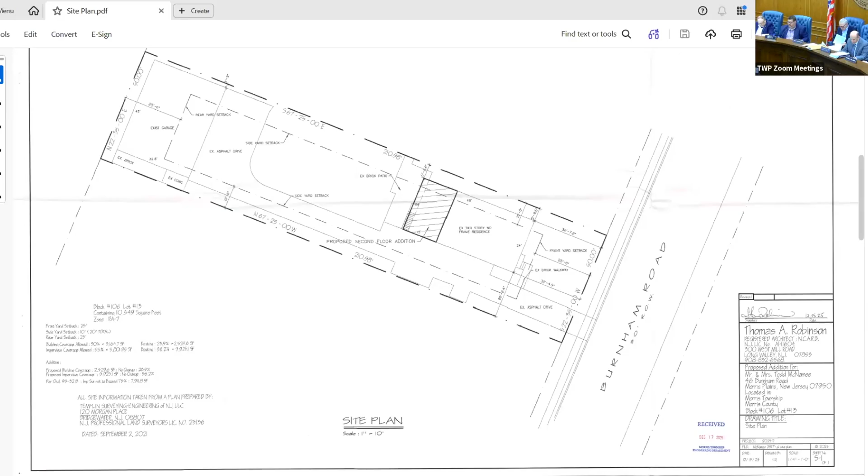Let me ask a question to clarify the interpretation. Is the combined side yard on the principal dwelling, or the principal dwelling and the accessory garage? Both. So you're taking one side on the dwelling and really both sides on the garage? Both sides on the garage are the combined, because we have a deviation.

1.8 on the other side, right, on the garage? Yeah, I think the garage is 1.8, and about double that on the opposite side, maybe a little bit larger, we'll go 3. Okay, so that's the combined side yard existing condition.

If it's lawfully existing, it's not exacerbated, but on the other structure it is. So 4.8 for that, side yard's 5.8, not worsened, 6.2 on the architect's plan where we're doing the addition. Correct, and impervious coverage, right?

Is there impervious on this too? Yeah, the impervious is not exacerbated. The proposed addition cantilevers over the existing stairs and brick pavers. I know, but we don't know how we got to that number in the beginning, so I think we should honor that variance now.

I would capture it now so that there is a variance in place for it, correct. Okay, so those are the 3. So we're doing a variance for impervious coverage also, just to clear it all up. Yes, and there's no water issues on your property now, is that right?

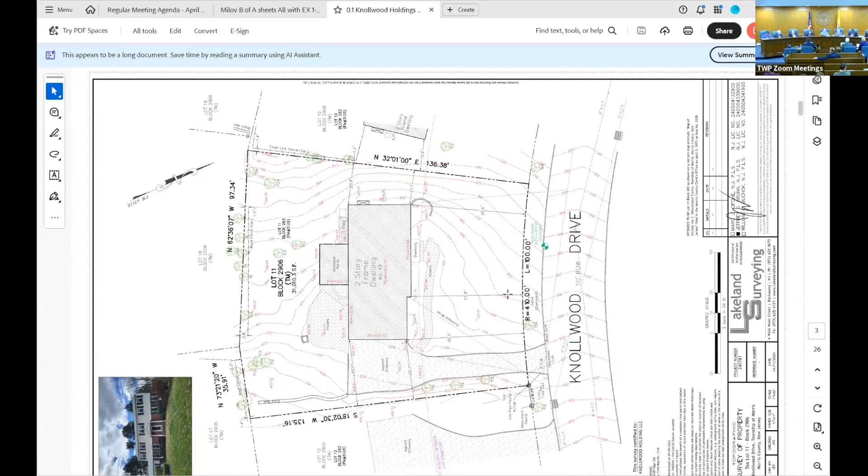Joseph noticed that the area on the survey was incorrect. This is the original survey, showed 31,000 square feet, and we found out that the surveyor did make a mistake and picked 2 lots instead of just our lot. So he resubmitted the survey to us with the corrected area, 15,791.7 square feet. And the zoning chart was updated to reflect that accurate lot area. Fortunately, it didn't cause any new variances to be created, so we're still compliant with the building and improved lot coverage.

So basically, any reference to the original sought-after building height of 38.4 has been crossed off and eliminated from the application. The only thing that we're here for tonight is the 2 side yard applications.

We have the left side yard, as you recall, due to a bump out. I'm going to scroll back over there. We have a proposed bump out in the front, which is respecting the front yard setback. But because the site is somewhat trapezoidal on a curved street where the lines get closer and closer as they get closer to the street, the side lot lines - our proposed corner is 0.5 feet closer to the side yard than the existing corner of the garage, which is 29.7.

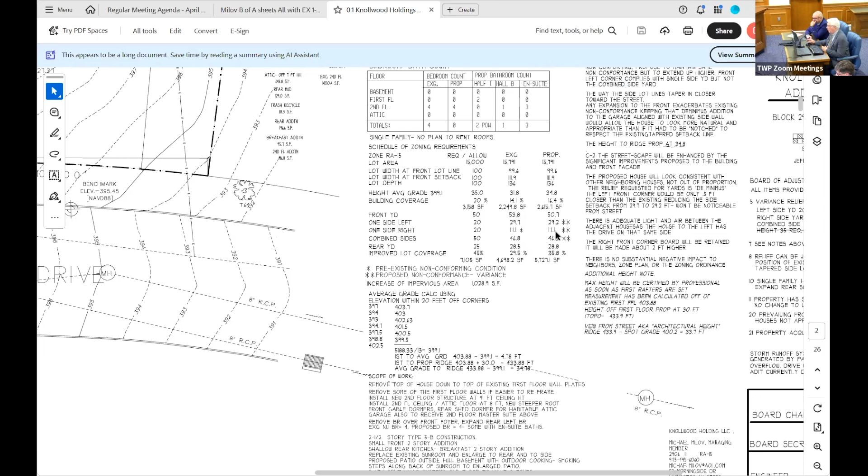I should have mentioned this - the left and right side yards also needed a variance for combined side yards because of that tapered lot line situation, where 50 is required and we're proposing 46.3. The one side on the right is currently 17.1, proposed to remain at 17.1, but we were asked to get a variance because it's going up a little bit higher than it is now. It is a variance, yeah. And then the left side yard I mentioned is now 29.7, proposed to be 29.2 feet.

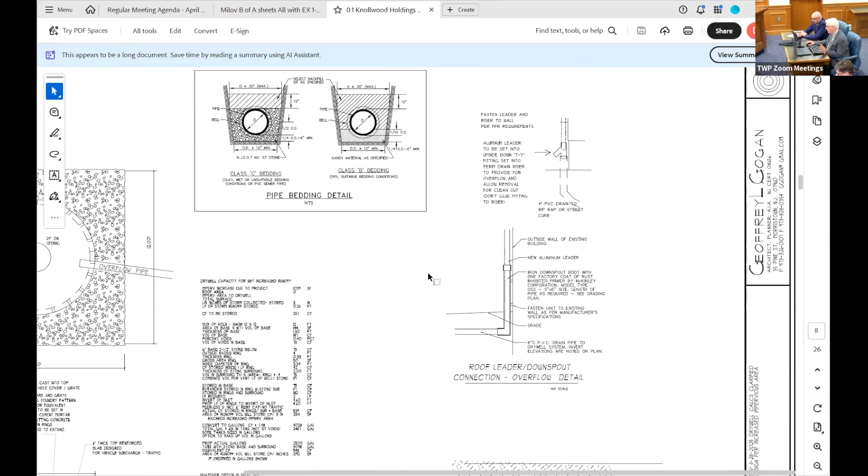So I think I'll go ahead down - that's the survey I talked about. Let me see the sheet numbers here. Okay, C4, I'm going to skip over these. None of these site details changed - they're just details for the grading, the stormwater, the plantings, some of the other details.

This is the first architectural plan - the original basement foundation plan that was filed. There was no substantial change to this plan, really no change that I can recall at all. All I did was clarify the room names. So this sheet has been replaced by this one, where I also took off all the architectural dimensioning and everything - I just left the room sizes and room names so it will be easier to discuss.

Essentially, the basement has a full basement below where the sunroom is now, and it's being enlarged a little bit, but right now that's just open space where a deck foundation exists. The sunroom was built on top of the deck. To the left you see the foundation, the existing garage slab is here, and the proposed bump out is over here. The existing full basement has a finished portion in the front and an unfinished portion in the back. The mechanicals will stay where they are. This portion here, he hopes to have a hobby baking kitchen with a slightly different feel, where he may have to leave dough overnight and things he'd prefer not to do in the residential kitchen upstairs.

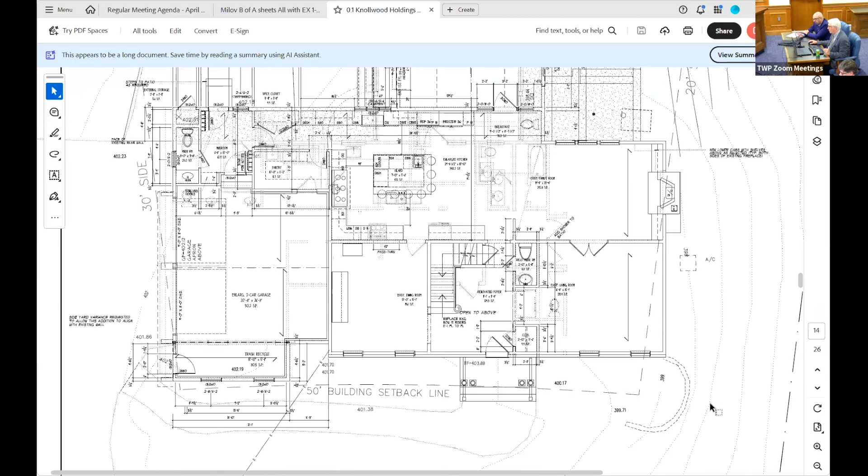I'll go back up to the site plan just to refresh you on the fact that we have these two side yard variances that we need.

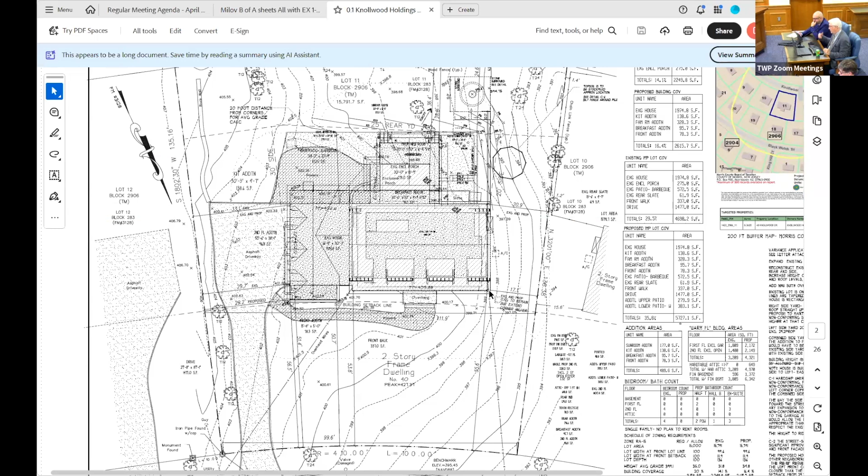Okay, so basically we have the pre-existing 17.1 to this corner. It's really not going up very much because it is going up a little bit, but not too much, so it's still good. It still looks like every other second floor in the area, pretty much, so that is staying the same.

And then this corner, I'll just zoom in here again just to make it clear. Essentially, we have the bump out causing that half foot closer to the side yard.

We actually talked to Dave Hansen about setting that corner in to respect the existing 29.7 setback, but we tried drawing it and it really didn't look that great. He agreed with it, and he had originally thought we should be able to get away with it. But so anyway, we're asking for the 29.2.

We don't feel it will really make much of an impact from the street because the adjacent house has their driveway and parking on that side. So there's still quite a bit of space, way more than normal or required as far as the distance from house to house. That is pretty much what underlies these side yard requirements.

We have an extensive storm drainage system proposed here with an area drain, and all of this is going to be reviewed by the township. I think that kind of summarizes the architectural end of it.

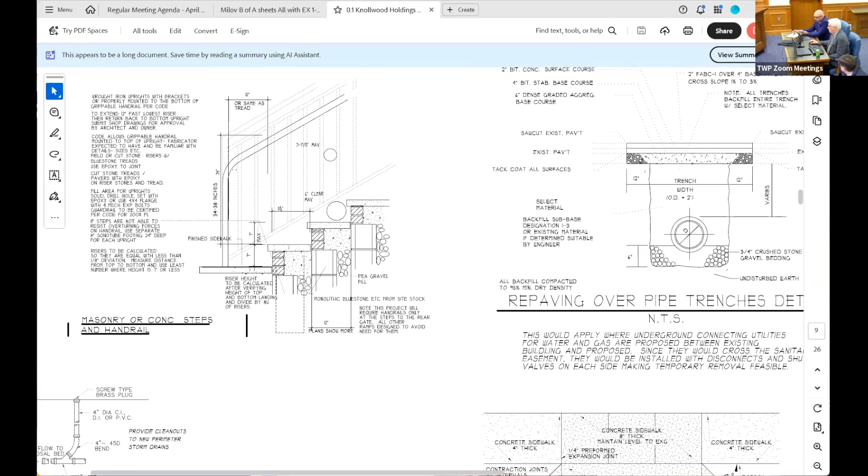Let me see, I think I just lost the... I'm gonna have to stop sharing and share again. I'm sorry, I must have just clicked something.

Okay, so the front appearance, we feel, is... I do have a picture somewhere in one of these exhibits, I believe, it was actually attached to the application, but basically it's very similar to the existing in the sense that the front door is still where it is.

The portico is being improved with nicer columns around it. All the windows will be replaced. The brick will just be extended a little bit and painted. And then a high quality siding will be installed like HardiePlank, with good quality roofing.

So basically it's just being an upgrade of a nice looking house. I left the roof pitches of the dormers as they are, but I lowered the dormers, of course, to agree with the new ridge height.

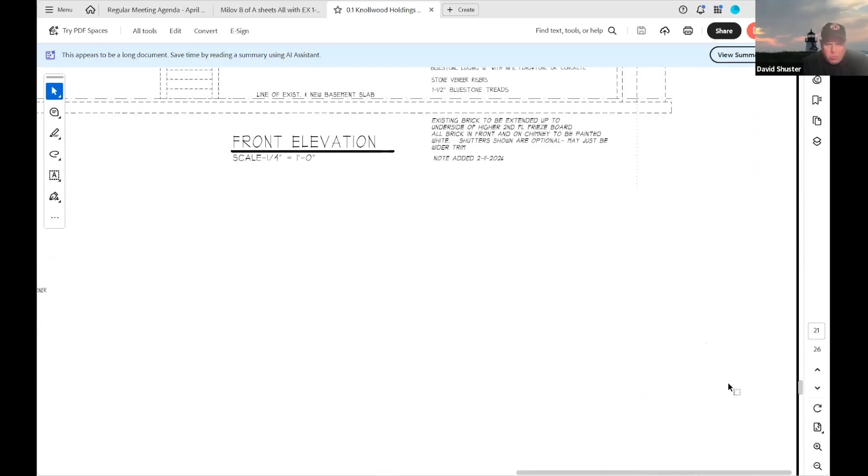Right, but then my concern is the use of the word 'permitted' with this other elevation. They're side by side: proposed ridge at 433.9 and 434.3 permitted. I think first that needs to be stricken because there is no 0.4 difference from the proposed ridge to the permitted ridge. The permitted ridge would have to be within 0.2 feet to stay at the maximum 35-foot definition.

Right, so I wanted to understand what the statement being made on the plan is, and then stipulate to correcting and striking it to ensure a fixed height elevation.

Right, I think what I was saying there was we're proposing 34.8 feet to the top of the ridge. And what we'll do is when we're framing, we'll get the first couple of rafters up before we even frame the whole roof, and have all that certified to make sure we're not over the allowed height. I was just saying there that under the zoning by right, we could go to 35 feet, but I figured a little less just in case of a little glitch in the field.

So we aren't proposing an exactly 35-foot high ridge. I just mentioned I wanted to make a distinction there that if it was, say, 34.9 feet, the zoning officer wouldn't say you've got to go back to the board because they approved only 34.8 feet. I'm just trying to say that our maximum is the 35.

Proposed height is 0.2 feet from the maximum, and you're indicating a 0.4 spread between what you're proposing and what's permitted, so there's an error. It's only 0.2. So that would be 434.1 as the permitted next to it on all the elevation sheets.

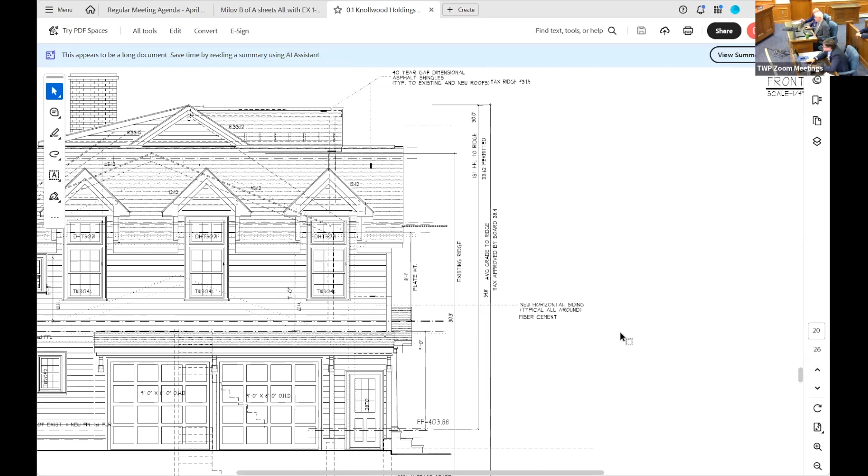Hopefully we can do that on the signature sets and just make it clear that we are not asking to go over 35 feet from the average grade. So hopefully the board can just accept that—there might be some remnant notes that I missed.

I think it's in each of your elevation views, between that reference to the 0.4 greater than permitted, that would be corrected, as well as the old max ridge line reference in a couple locations. Yes, I'll make sure we get those back.

The height calculation you're using for average grade is the same as last time to establish the average grade, which was 399.1, correct? And those are the same points provided by our township assistant engineer in the in-house calculation, then used for your calculation.

Yes, the 399.1, if I understood what you said, is correct. It agrees with what your engineer corrected us with. So we're using the same points for average distribution in 20 feet around, at a representative average grade height, as opposed to skewed in any particular direction.

You're agreeing with the calculation from our assistant engineer? Yes, I'm agreeing with it.

Okay, and the only changes made architecturally to the height were the first floor ceiling height, the second floor ceiling height, and then the ridge coming down in the habitable attic. So that being cumulative, correct, what would be just over 3.5 feet that were reduced architecturally in the plan.

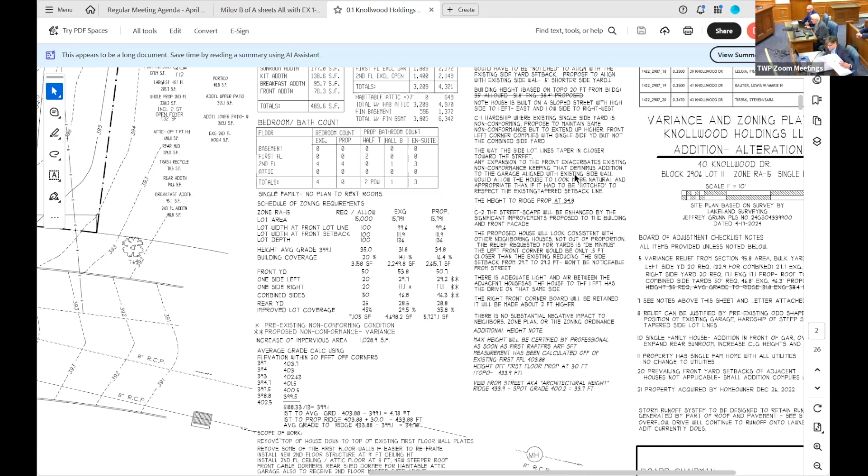And then on Board of Adjustment checklist notes, item 5, variance relief from section 95.8, and at the last line of that you have it stricken and corrected. So I'd prefer to see those items corrected on the plan set, on the board signature sets. I will correct those and make sure there's no ambiguity.

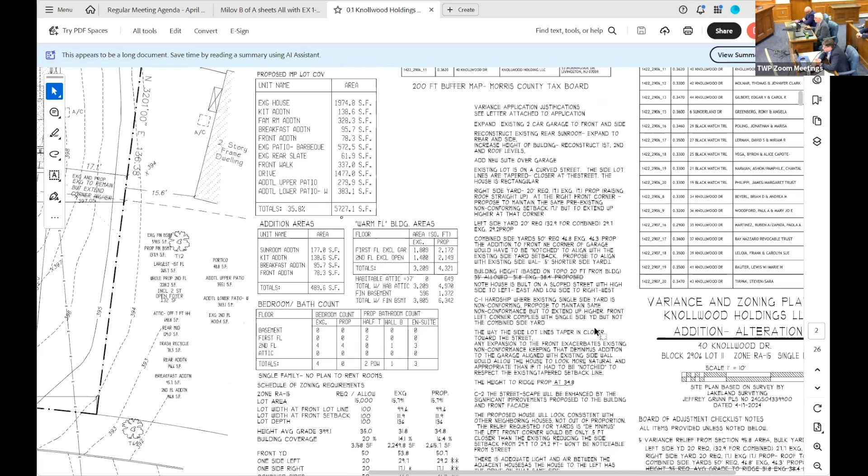Okay, and then the tables that you added, part of the earlier testimony, the warm floor area, building areas, and the bedroom/bathroom count areas, just to go back over those and have a better understanding for the existing floor area in the structure. We have first and second floor warm floor areas identified at 3,209 square feet.

And then is there a habitable attic, or is the habitable attic being created by the proposal? It's being created by the proposal. So currently it's not habitable, not roughed in any way. Right. And that habitable attic being created at 643 is slightly less than the prior, I think around 670-ish, yes, because of the 7 feet clear height. Yes, it came lower when we lowered the pitch.

And the proposal for that habitable attic, does that include just open floor space for open den use? Yes, it's not intended for additional bedrooms. Correct. Or plumbing to the third floor? Right, there's no plumbing, no bathroom proposed, just mechanical equipment and an area to do homework or have a little home office or quiet space if somebody needed it. And the applicant would agree to that as a condition? Yes.

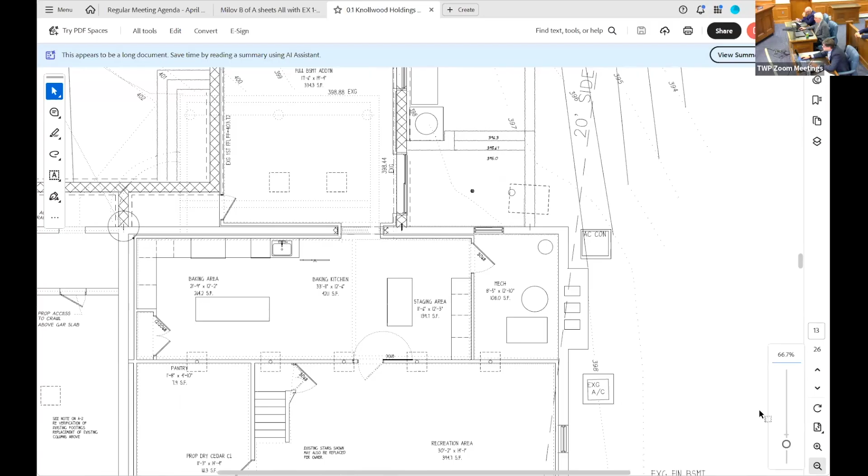It's unchanged. Okay, so the total habitable space, that area is partially finished currently, about a third of it is finished currently? Yes, this front, a third to maybe I'd even say closer to a half? This whole area is finished. So probably close to half is finished.

All right, and then so the total habitable square footage of the home is correctly stated at existing 3,805, and then increasing to 6,342. I have to go back up there.

I'm sorry, could you repeat that question? So the total with habitable attic and finished basement: existing at 3,805 square feet, and proposed at 6,342.

Yes, if you count the entire finished basement and habitable attic portion. That's the clarification I want the board to understand. You have the correct square footage of habitable areas on every floor, and the cumulative total is correct, no error. I wanted to get the subtotals because some people were wanting to include or exclude the basement and garage.

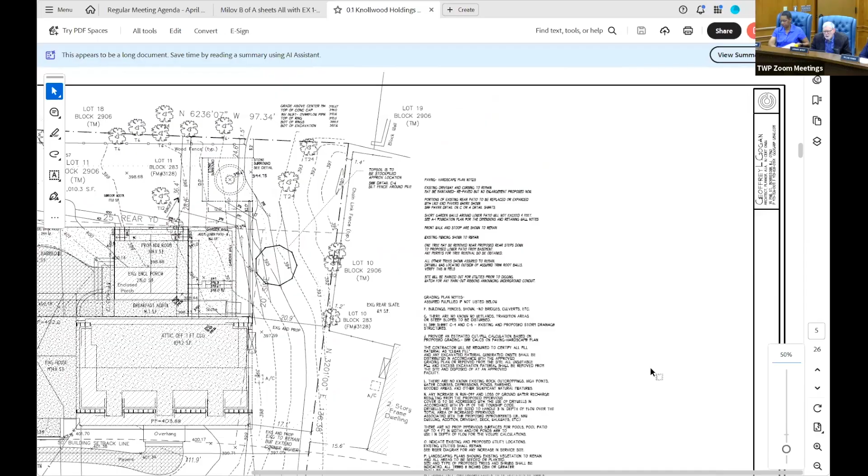So then the basement kitchen - can we stipulate that it won't be used for commercial purposes? That's a big kitchen. I mean, I like to bake too. That's a huge kitchen, you know, it's going to have to all be designed.

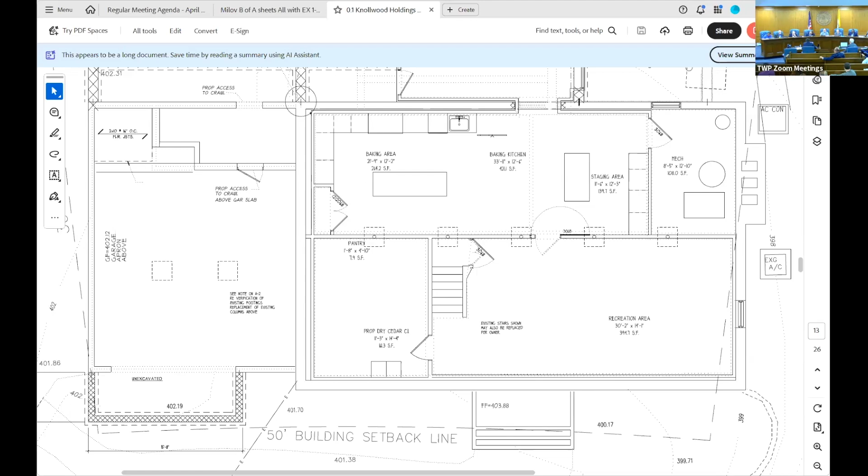Okay, thank you. Can you tell me approximately what percentage of the home is being demolished, and how much of the existing home is going to remain?

I'm sorry, the question is for the architect. Roughly a percentage.

If you don't mind, I'm just going to answer it this way. The entire rear sunroom is being demolished, and the roof over the existing garage is being demolished to make the new floor for the bedroom. But otherwise, the existing roof of the house is coming off, and the existing second floor walls and structure are coming off, because we're going to extend the first floor walls higher and build a new second floor, with pretty much the same layout. We're just lifting it up.

I heard earlier, maybe I misheard you, you mentioned something about needing the garage expansion for safety from animals. Is that what I heard? Maybe I heard you incorrectly.

I was talking about the reason we want to have this bump out in the front was to provide more space for bins, where it's convenient, right near where you would take them out to the curb for recycling and trash, and not have to leave them outside in an enclosure. But it's also to provide a way to have a pedestrian door that you could walk in without raising the overhead doors, so for example if there was a delivery or somebody visiting, they could just come through that side door. Okay.

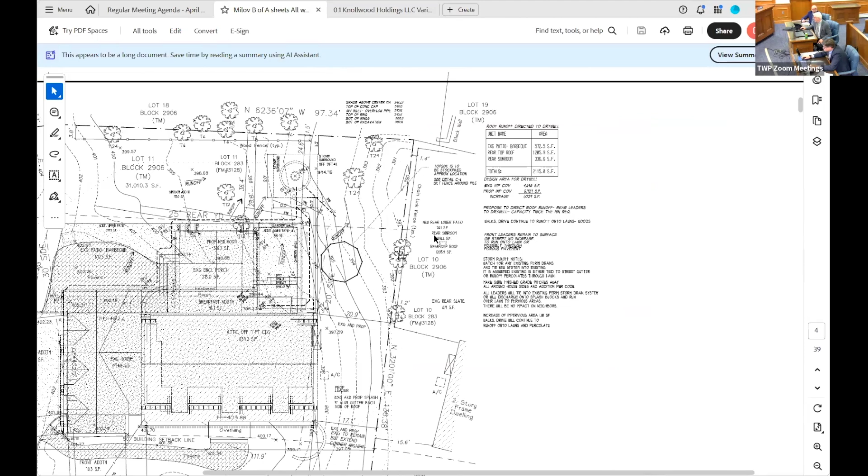This is the original set of files. So I'm going to zoom in on this. No windows. This is the existing house, the front here, and this is the left side where you just have the garage doors and the side of the roof. So there are no windows on that side.

Okay, and my last question is, did you identify any specific purposes of the MLUL that you're relying on for your C2 variance?

Yes. I don't have my physical notes here, but I did include that in my application as an attachment, so it's with all the original documents and online. And so I'm just going to use my exhibit here to go through it.

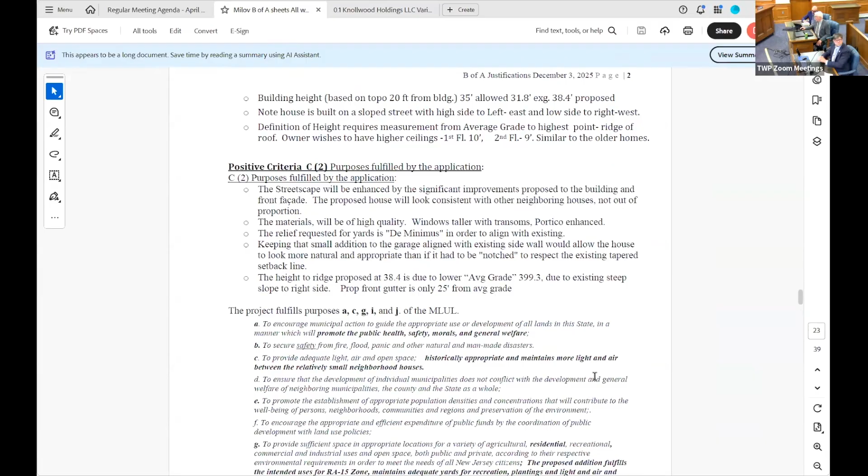Essentially, basically, as I mentioned earlier, we have two paragraphs of proofs. It has to do with the C1, which has to do with the hardship. And we feel that those existing tapered lot lines and the pre-existing non-conforming corners could be qualified as a hardship that an owner has to just cope with. For example, the 17.1 on the right side is what it is. We're just going up a little bit over that.

Right, my question was about the C2, though. I understood your testimony about C1. Okay, so the C2, I feel that we're providing, we're fulfilling paragraphs A, C, G, I, and J.

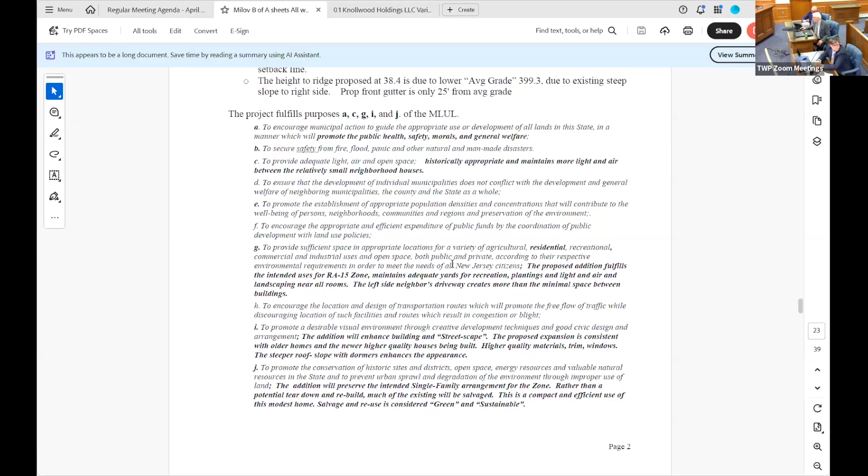A has to do with safety and general welfare, and the fact that the garage is going to function better and have a more suitable way for guests and deliveries to come and go, and have the bins controlled and inside a secure area.

I'm sorry, you said deliveries come and go? Well, like if someone has a delivery, or if a guest comes and they want to visit and come through the side door, that's all. Okay, but you're agreeing it's not a commercial use? No. I mean just a private home delivery.

Okay, I don't have any more questions. Let's pause for a second. In providing your proofs, the promotion of public health, safety and general welfare, as you're stating them, they need to be comprehensive to the public and the township as a whole, not to a benefit of the applicant.

It can't be rephrased from personal to saying the applicant. And the way that you just stated that was specific to the operation of the trash and other things. Frankly, trash management is something that all neighbors have to address and need to conduct safely. So whether it's in the garage or in a designated area inside the garage or in an annex, that's not constituting the proof as stated — it was more individualized. I'd like you to just revise that statement to make it more broad to the public and to the township to satisfy the proof.

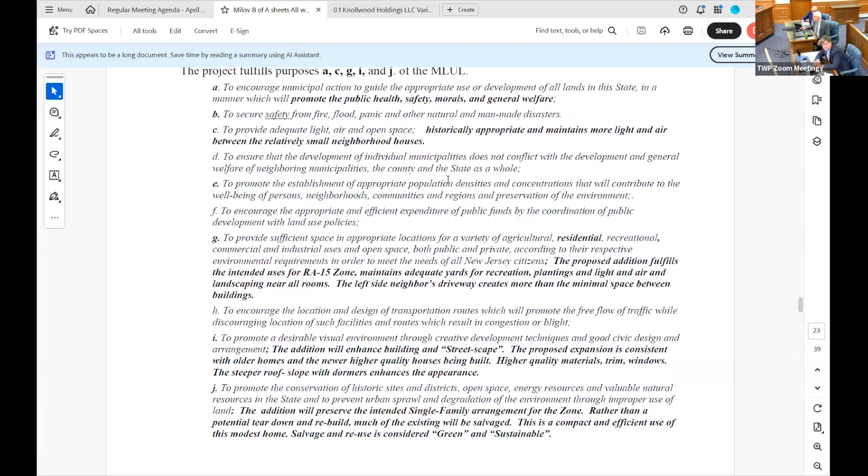Yes, and in your direct testimony, when you spoke about the C2 proofs, you mentioned aesthetics, which is purpose I. You didn't say purpose I, but that is purpose I, right? Correct, yes, I would use the aesthetics, yes, in your application papers. But purpose I is with respect to aesthetic improvement. I'll accept what Joseph is saying about the purpose of A. Well, in all the purposes you are speaking to, the benefits are to the global welfare of the township and the residents and the neighborhood, as opposed to the applicant.

Okay, well, I'll accept that you're probably more aware of that global intention for those paragraphs. I've used those before and felt that, for example, historically appropriate under C, where the house is traditional and it's providing light and air between homes with the way the roofs are set up.

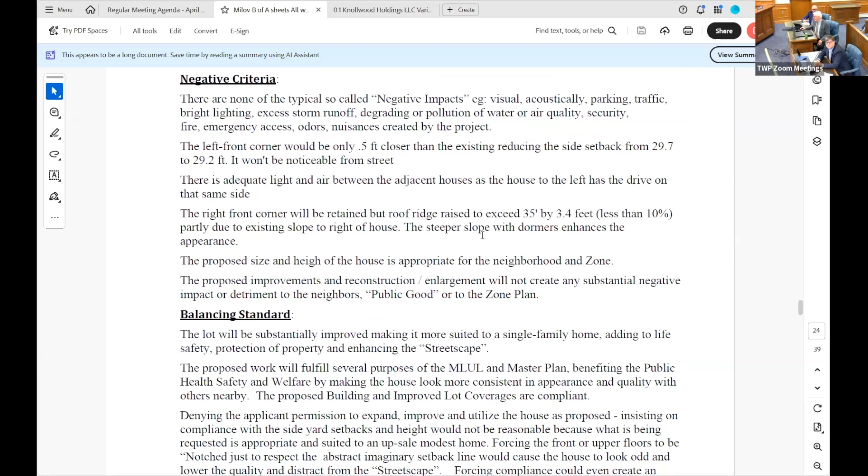And then G has to do with residential uses and the fact that we are fulfilling the intended use for the zone, being a single family home, but updating it for current needs of this period of time, where you have multiple people in the home living together, working, going to school, and doing a lot more in the home remotely than they used to do. Is the existing home vacant or underutilized?

Is the existing home vacant or underutilized, or unable to come to market to be inhabited as it currently exists without additions and alterations?

So basically, purpose I is the key that has to do with the improvement to the streetscape, and the fact that it's consistent with the more traditional older homes, the higher quality homes being built, and the high quality materials, trim, top of the line windows, and the steeper roof with the dormers just creates a nicer street frontage.

Okay, but you didn't answer his question. Is the house currently vacant? It was rented for a year or so, but I think it's vacant. It's vacant right now? Yes, vacant. It was supposed to be under construction by now, but we're delayed.

So the lease had run its course as opposed to becoming an underutilization or vacancy. Right. Is it marketed currently? It's not being marketed now. Okay.

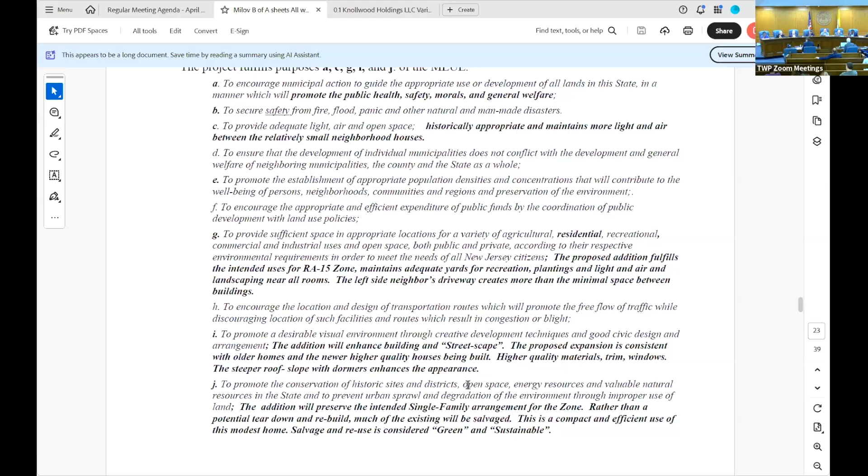The existing home can be in character to the neighborhood, and the proposed improvements can also be in kind with the character of the neighborhood, if that's what you believe the appropriate improvement has been architecturally put forward to promote, while providing for a modernization that makes the home more marketable and desirable for a longer continued lifespan. Right? It can be both.

I just want a clear understanding of whether it needs to occur because it's underutilized and not marketable, and therefore coming back to the neighborhood because others have done improvements, or if we have a neighborhood that exists as it has been, mostly with minor improvements, and this larger scaled improvement is still in kind with that neighborhood. That distinction should be understood by the board and in the proof.

I wouldn't object to that. I think that's a good way to state it, and I'm going to try to remember that.

So you find the existing home as is in character to the neighborhood, and you feel that the proposed improvements modernize and help the home, improving it while keeping in character to the neighborhood. Is that your testimony? Yeah, I don't feel that the improvements are too extreme to where they start to look out of place, and the fact that we're still pretty much consistent with the yards and so on. Okay.

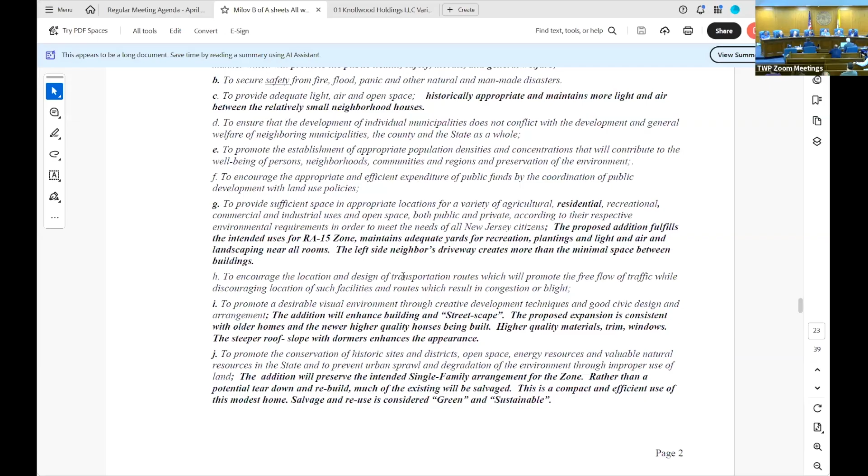Good evening. Timothy Dixon, 14 Kissel Lane, also an owner in the neighborhood. Before asking about the variance on the front of the property, I noticed that the back of the property, the yard, tapers out to the left. Why wouldn't that extension on the garage be able to be put on the back of the house where the variance would no longer be needed?

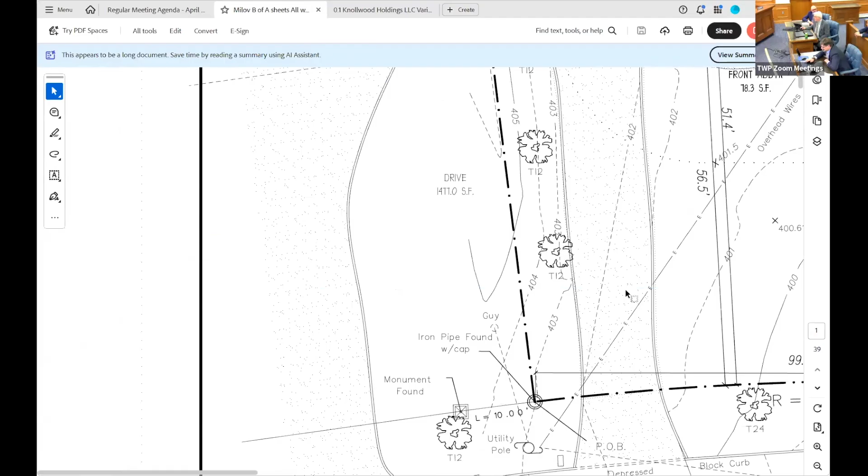Okay, I'm just going to go back here so I don't have to scroll. You're saying, what you're asking is why is the bump out in the front not feasible on the left side of the house? Yeah, generally before you ask for a variance, you've exhausted all other options to make the property work and be in conformance with the permitting laws.

So my question is, there's plenty of space on the back of the house. Why wasn't the extension put on the back of the house? It would still serve the same function, access for deliveries and guests and an area for your trash, but you wouldn't need the variance.

All right, so there are many ways to do things. When I was looking at this project, I think it really came from the front elevation. I'm going to go down to that, where we always try to avoid allowing a house to look too boxy, so to speak. Where you just build over a garage and extend the roof, and all of a sudden it looks like it's much too big.

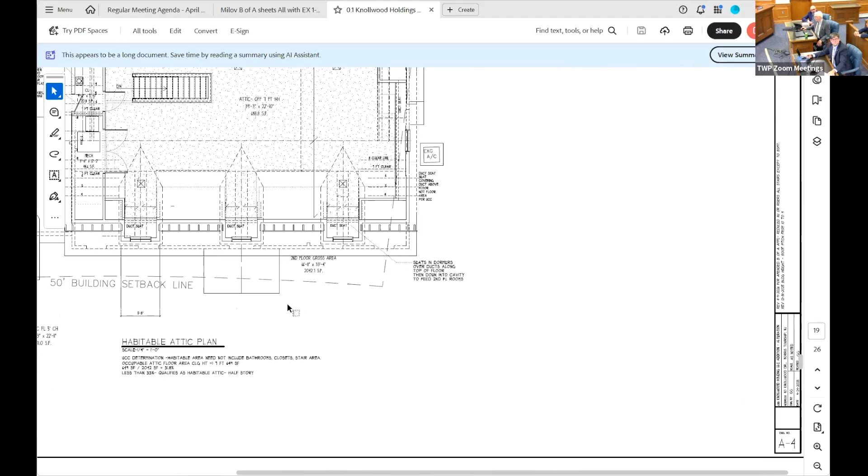So I wanted to be able to turn the roof 90 degrees over the garage, and make it look like almost a mass that has its own roof connected to the original box of the house, which is here. In order to do that, I couldn't just have the side go straight across. I needed some corner boards and a slight difference in the front elevation. I wanted to turn this corner back, then come across and come back out, and have something under this new gable end, which was also becoming part of the master suite above the garage.

So it just made sense on both levels to do that here, for the sake of the front elevation, so that it made the reverse gable, or the 90-degree turn of the main roof, make sense and look like it needed to be that way for a reason. So again, I'm not an expert in this, but it sounds like it's more aesthetics than actually needed for function to be able to build the property that way.

Well, certainly aesthetics is part of it. But unless I'm understanding it wrong, aesthetics is not a need for a variance. Well, I didn't see that in the code list. I don't know it exactly, but.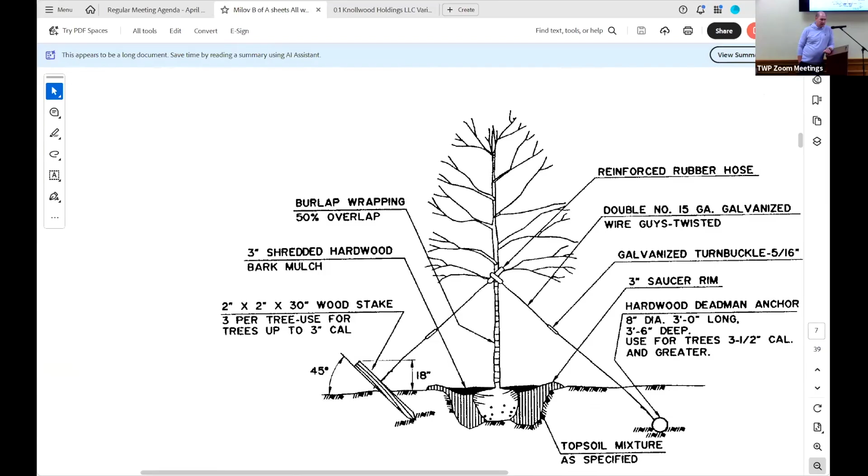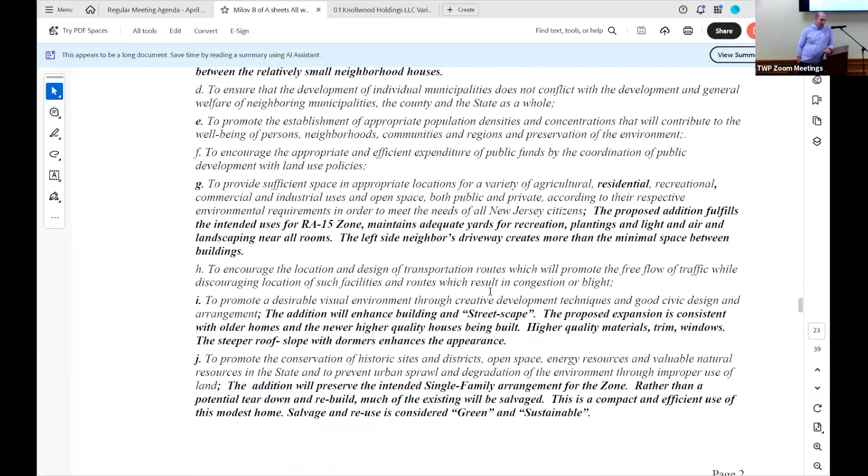So those purposes do include what's known as C2, which has to do with aesthetics, where you can use aesthetic improvement, especially if it affects the streetscape, so to speak — basically something that will improve the yard, streetscape, landscaping, and overall appearance. It is an accepted justification for granting a variance, even alone, without practical hardship.

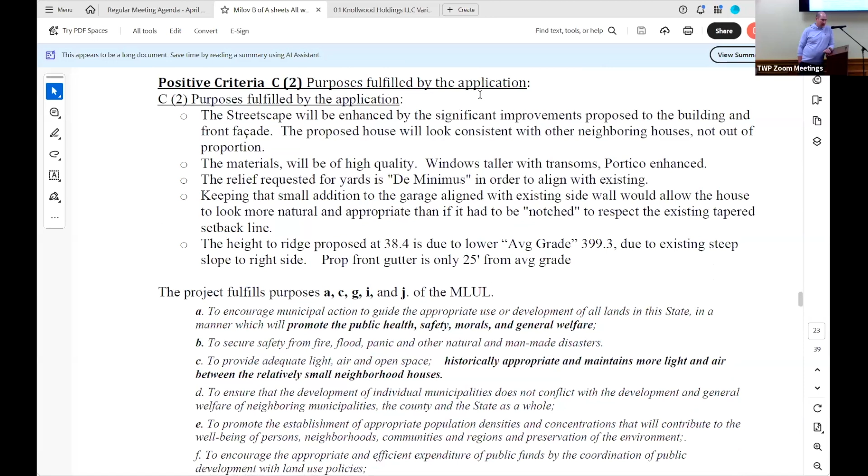Right, but the bump out was a C1 variance, not a C2, correct? Well, it was both, because I felt it was C1 due to the pre-existing non-conforming corner, and we could have complied by just shifting the corner. I just wanted to show you that. No, I saw it. So we'll table that for now.

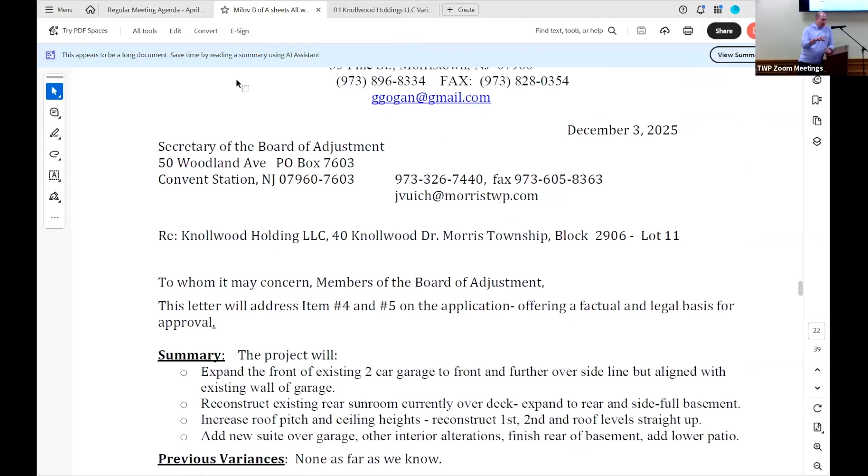You said that the updates are to be consistent with the aesthetics of the neighborhood. I believe this question was brought up at the last meeting: how many houses in this neighborhood have 3 stories with dormers on the 3rd floor? I can't tell you that answer — I haven't surveyed, I don't think. So the question was asked in the last meeting and not answered.

So how many homes in the neighborhood are in excess of 6,000 square feet of habitable space? I haven't done that analysis. They're counting the basement, and you're counting it before and counting it now, but you're making it bigger and more furnished, so you need to count that space.

So again, another question that was asked and not answered. Those are all my questions. Thank you. Thank you.

Brian Milio, 16 Canterbury Way. Just spell your last name, please. Milio, M-I-L-E-O. Thank you. In line with questioning, I guess, like the last two residents, friends of mine. I'm sorry, did you give us your address? Yeah, 16 Canterbury Way. 16? Thank you. Yep, thank you.

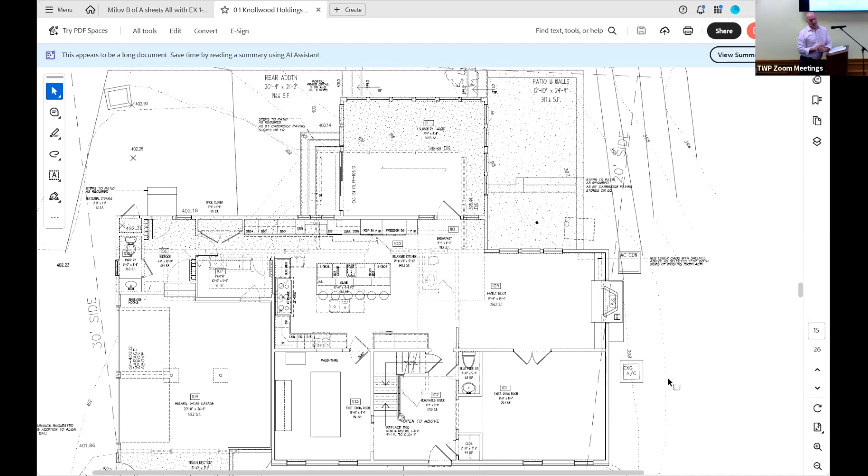In the application it quotes being in line with houses in the neighborhood. I think Tim asked how many houses are above 6,000 square feet. I would ask how many are above 6,500, and ask you to check that calculation on the square footage of the house. I would ask if you're including the closets in that calculation of habitable area. What is excluded from the habitable area? I'm assuming mechanicals, garage, you mentioned — what is actually excluded from the habitable area?

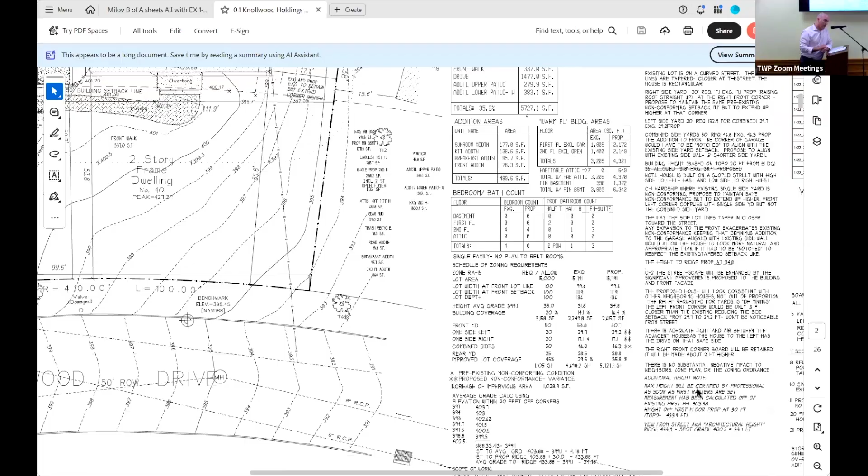Right, let me just say that when we look at building coverage, or in some towns there's a floor area ratio where people want to see the overall size of a house — we don't have that in Morris Township, but we measure to the outside surface of the walls, and it includes all the closets, all the mechanical space. There are some exclusions, but when a realtor compares houses, like if you see a house listed as 5,000 square feet, they're usually just referring to the warm floor area, or they'll qualify it and say plus garage or plus basement. So the 6,000 square foot number you're using is a total gross area of the house, not just the warm floor area, which is why I tried to show it separately.

The first floor, excluding the garage, is 1809, proposed is 2172. Second floor is 1400 and 2149, and that excludes an open foyer where a bedroom's being removed. So that total is 4321.

But then if you add, we have a habitable attic, which most people don't have. You wouldn't even notice it. It's still the same roof. Essentially, you're just finishing a little bit of it for a bonus room, so to speak. And that is counted as 649. That brings it to 4970.

And then if you count the finished basement, which is all below grade, just about all, there's some walkout in the back, but it's all hard to see, it brings it to 63. So you really should be comparing, if you want to look warm floor to warm floor, the way a realtor would talk about houses in the area, it's more like 4321. That's the number they would use to compare.

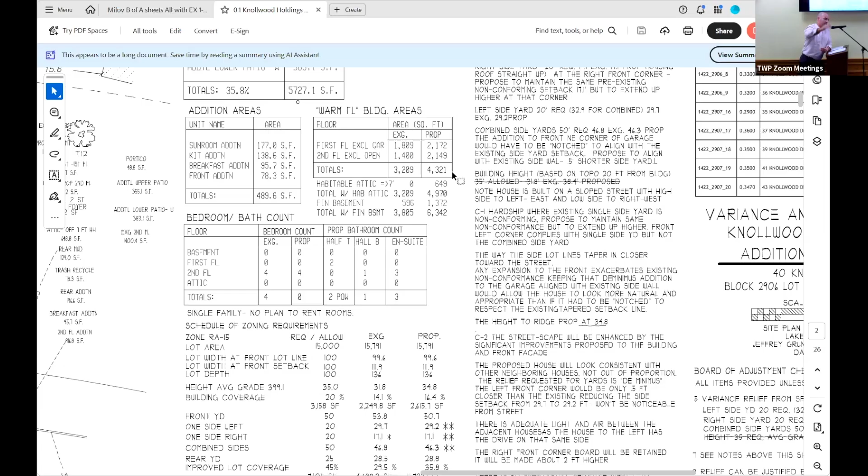So based on that, are you asserting that those extra spaces have no impact on the home or the neighborhood or anything of that sort? For the assessed value, because that's what you seem to be implying when you're comparing 4,300 warm floor, but you seem to be excluding, I see the number is there, but in terms of influence or impact, you don't seem to be putting much weight into that.

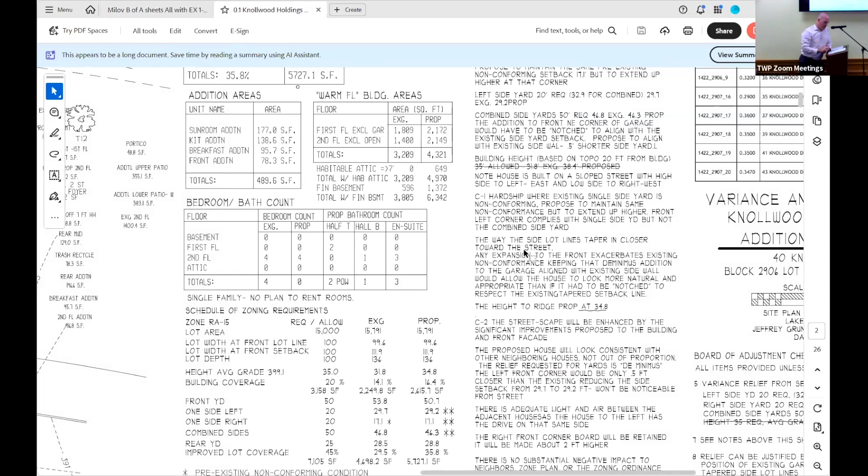No, I'm not really trying to say that. I'm just trying to say that, let me see if I can not have to scroll here. No, I'm going to do it. If I go back down to the elevation, because I think the overall point of your question is about the overall volume of the house as compared to other houses along the street. Is it going to look too big, comparatively speaking?

Well, that's one aspect of it, but I would think everybody in this room would be concerned of volume. If you create a box, as you said before, which would be unsightly, well, there's issues with that, but to create a box in that footprint and jam 8, 9, 10,000 square feet into it, I think there'd be a lot of concerns with people in the neighborhood, especially when the majority of these houses are in the order of 3,000 square feet. To Tim's question earlier, are there any houses that you came across in the neighborhood that are upwards of 6,000 square feet?

I think my answer is that basically you have a proposed 2-story house, which there are a lot of in the neighborhood. It looks like it's basically got a 9-foot ceiling. I don't know how many 9-foot ceilings there are, but that's not very uncommon in homes today on the first floor. So you've got a 2-story house. The gutter line is still about where it was, maybe a foot higher. And instead of a low slope roof, we have a steeper roof, but it's still a roof. So it's going to look like a 2-story house with a roof.

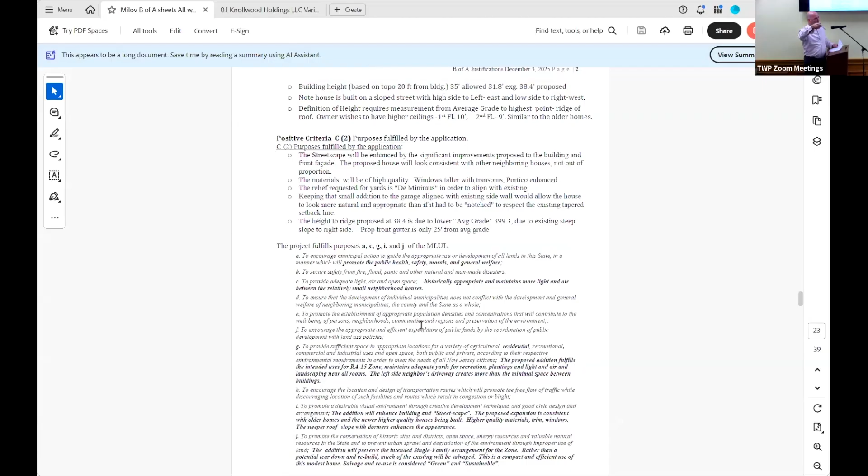So just to get back to something that gentleman mentioned, I want to clarify. The total square footage under roof, habitable, to the outside walls, including the basement and the attic, is 6,342 square feet. And the only thing we're excluding is the garage—does that include the garage? Yes, so everything under roof is 6,342 square feet.

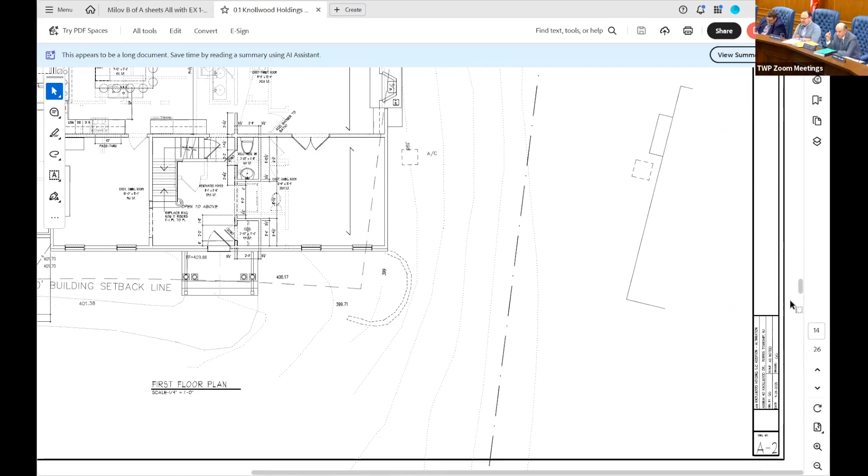Let me just go back up and make sure. Looking at the floor chart—first floor excluding the garage, and second floor excluding open areas. Would that be open air areas from the first floor up? There's an open foyer at the front door, because you have a two-story foyer coming in, right? Right. Okay, so we're all on the same page.

What's the under-roof square footage? Well, it's correct to say that both of those areas for the first and second floor did not include the garage—the existing and proposed did not include the garage. 'Cause I thought... okay, that's the nature of the question. Well, that's not really the question, but we'll get to it again. So under roof is...

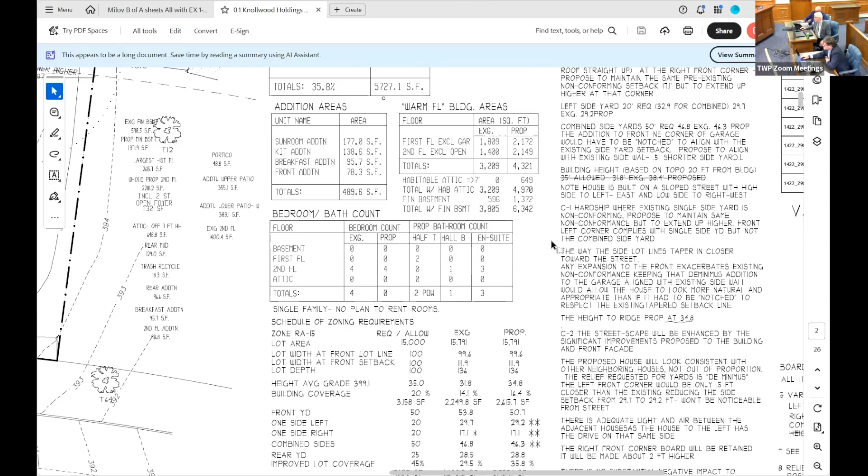6,342 square feet plus the garage? I think I can give you that. I just want the number under roof—what's the under-roof square footage, including the garage? Yep. Okay.

The garage is 20 by 26, so 512 square feet is the garage. Rounding up to 600, that's proposed for the garage with the addition.

Well, he just said 512. Let me check that number. That was the existing. The first floor plan shows the enlarged two-car garage at 512.2 square feet. There's also the trash recycle area below that, which is 80.5 square feet. So cumulatively that's just under 600 square feet of trash recycling and two-car enlarged garage.

So 592 and a half, right? Okay, so we're around 6,900 square feet, a little over, under roof. Right, that's what I'm asking you, you drew the plan. What's the number? Yes, if we could add the garage back in, you'd be up in that area.

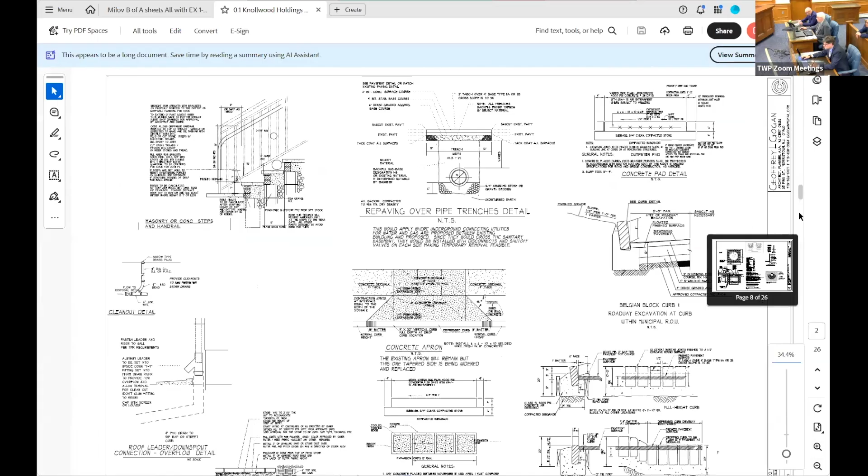Mr. Aller: during the break, the applicant's architect came up and mentioned some possible modifications to the plan. I talked to the owner about it, taking into consideration the neighbors' concerns. I'm going to go down to the elevation here.

What the owner is agreeable to is removing all 3 of the front dormers from the front roof, just having roofing there, similar to the other houses. He'll give up and stipulate that he doesn't need to keep the habitable attic—it would just be a plywood floor for storage and mechanical, like most attics are. That would remove warm floor square footage from the house.

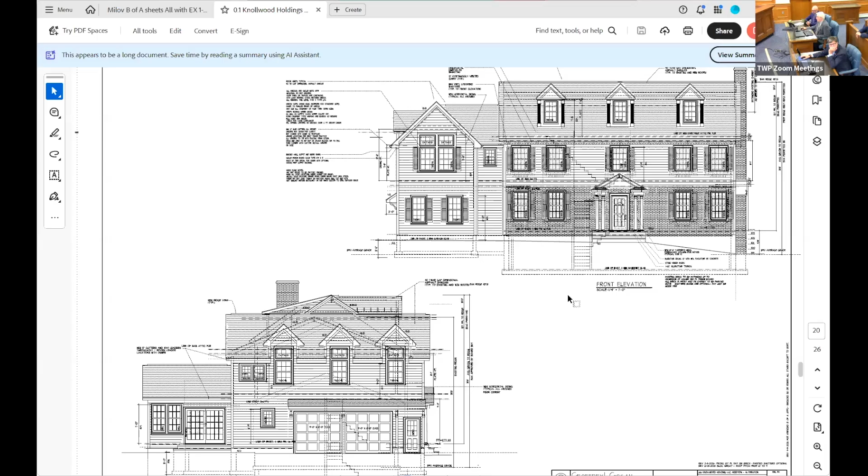In addition, regarding the basement kitchen, we would just call that a wet bar—just a sink and refrigerator like you'd have in any recreation room in a basement. We don't have to call it a baking kitchen or staging area. It would just be for workout equipment, like other residential uses in the basement.

So those are 3 substantial changes. Let me just zoom in here.

There was another concern about the front bump out. We'd like to keep a door there if possible, because the overhead doors, columns, and girder are where they are, and I can't fit a door in there. There is a door in the back, but it leads to a finished mudroom area, not an unfinished garage area. So we could take about 1 foot 2 to 1 foot 4 inches off the depth of the front, and that would happen all the way up, maybe even more—we were trying to keep the door and enough room for trim and structure. That would basically bring this corner closer to the existing front wall of the house.

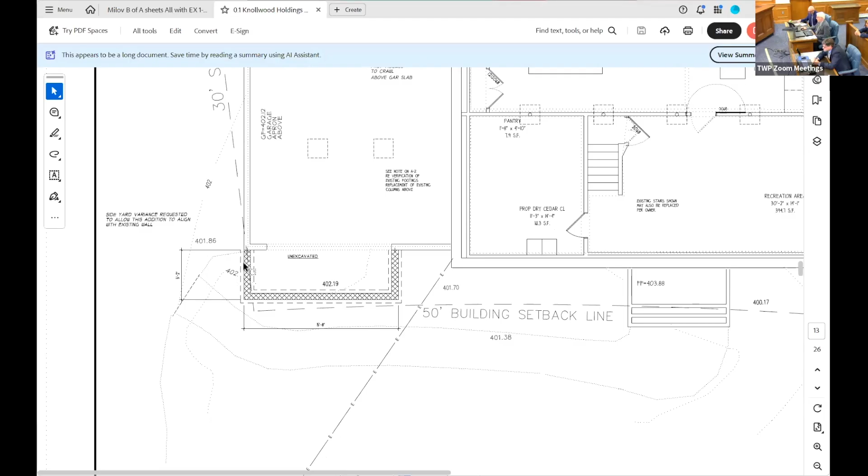We're willing to discuss this front bump out if it's a problem, but every foot you go back reduces the non-compliance with the side yard. We don't think it's feasible—originally we didn't want to notch there, but we could revisit it. If this corner had to be pushed over half a foot, it wouldn't quite look right, but we might be able to revisit that. Pushing this whole wall back a foot or two inches would make it look more agreeable with the existing front plane of the house, and we could still have enough trim and corners to make the roof look logical.

Do you know what the setback would be? Are you able to do a calculation where if you continued that front wall across to the point where it would intersect with that new section of the garage, what the setback would be from that point?

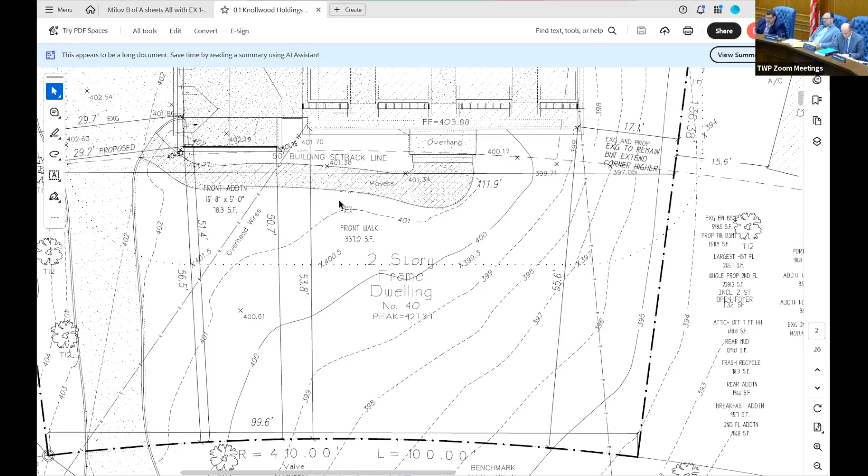Yes, right now the existing setback to the existing corner of the house, to that main corner, not the garage corner, is 53.8 feet to this corner. Our proposed setback to the corner of our bump out was 50.7 feet.

So if we went back a foot, it would become 51.7. If we could just adjust that, the setback to the corner of the garage right now is 56.5, and the proposed front on that corner is 51.4. So basically we'd be adding to the 50.7 to 51.4, whatever amount we go back.

Yeah, I meant the side yard. Because if you're going to ask the board to get to a vote, what are we voting for then? So what are you proposing the side yard setback would be?

Currently it's 29.7, you're proposing 29.2. So when you move that wall back so that it's consistent with the front wall, you get to that point, and that point to the side yard is what? I'd say we could call it 29.4.

So you have a 0.5 difference in existing to proposed. And then you have a 5 foot, 2 inch difference in the proposed bump out forward. So roughly on a linear scale on that corner, each foot you go back is 0.1 of a foot in setback. Exactly.

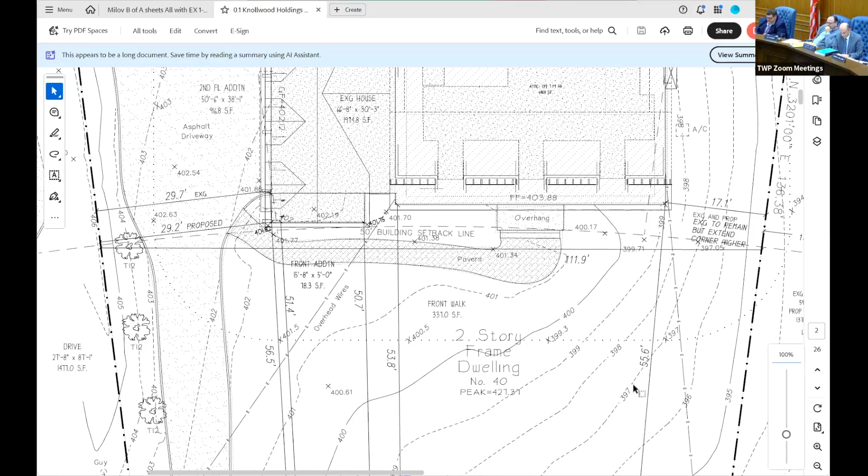So I think for what you were discussing, about a foot to 2 foot back would be another 0.1 or 0.2 feet on the setback, respectively. Okay, I just think we should know the number. Well, I think we could go ahead and just say we could agree to 29.4, and I'll make sure the plan agrees with that.

So your proposal is to change that side yard to 29.4 feet.

Okay, the basement change would be only a wet bar, sink, rec room, right? No separate kitchen. Right, I think that was the key, really. The habitable space on the basement is the same, it's just not specifically purposed as a kitchen.

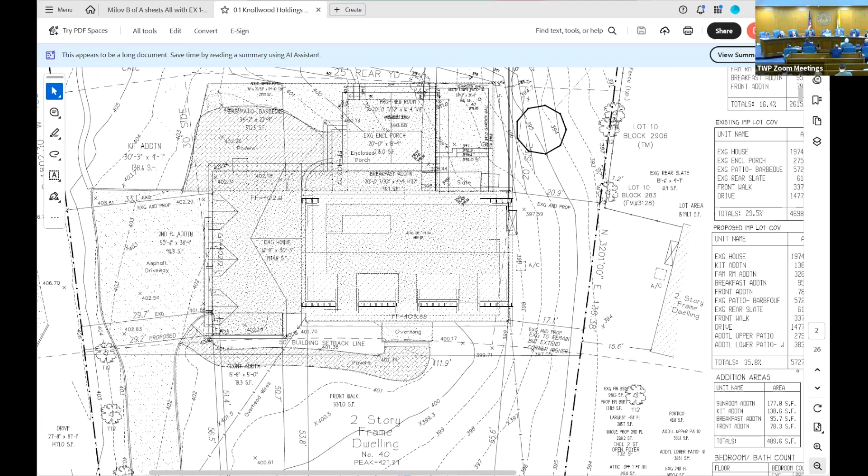And removal of the 3 front dormers. Is that all of it? I believe so, yes. The habitable attic also - no habitable attic. There's still an attic, it's just not noted as habitable, which means you're not finishing off the attic. Correct.

That's everything? I think that was it. Yes. Okay, so we understand the change of the plan. Do you have any other witnesses? No. Okay, I thought the owner wanted to say something, no? No, you're good?

Yeah, you didn't finish cross. Oh, I thought the line went away, so.

Okay, members of the public, we can still continue. Going to open the public portion.

Well, can the public see what the plans are specifically? Because they might... sir, but we need you to come to the microphone.

Paul Woodford, 36 Knollwood Drive. Thank you, 2 houses down.

I think the public has a right to be able to see the plans and evaluate them before any vote, so they can make a meaningful cross-examination and meaningful comments. So I think we have to have revised plans before we can do anything else. Yeah, and honestly, I don't disagree. I know you're trying to say all these things so that the board would vote tonight, but they're important.

You can see you brought out the whole neighborhood, that's how important it is. And I think we need to know, really, if we're going to - we need to know that it's 29.4, for example, right? So we need to see that plan, and then I think there might be a fairly quick subsequent meeting to resolve it.

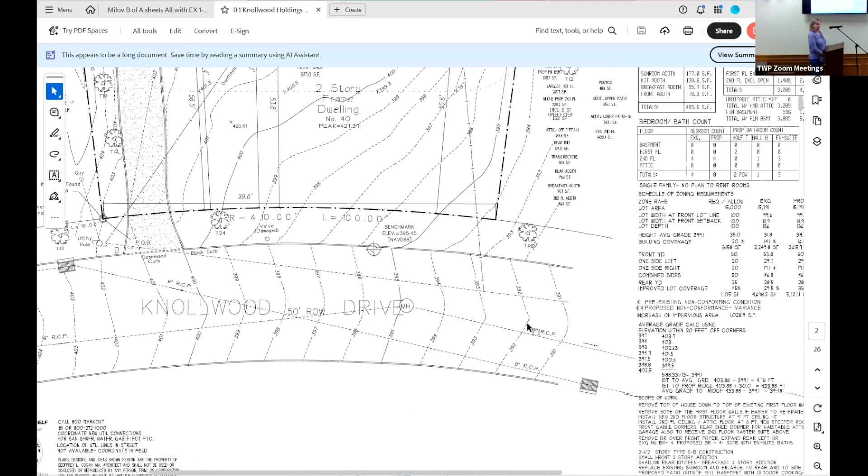The reason I'm hesitating is this whole thing is kind of a moving target. I know we have a lot of pull-down stairs, and the owner would probably be agreeable to it, but we can talk about it, and when we resubmit, we could look at it. Even for unfinished attics today, we often put in safe stairs with handrails where you don't have to use a ladder or a pull-down stair, because people are going up in age. They want to feel secure going up and down to get Christmas decorations and so on, and be able to send anybody, like a child, up there to get a box. So it isn't uncommon to have a comfortable stair up to an attic.

I would agree if the house was the size of my house, but being the house is so large and you have so much storage in the basement, why wouldn't you just put these items down there? It's getting to the point where there's a lot of recreation space, and now the kitchen's getting much smaller. This is questions for the applicant.

We have mechanical equipment that has to be maintained. I don't think it's necessary for us to agree about what kind of stair we're going to have to the attic. These things are starting to cross over into the owner's preference, where any house could put in a stair to an attic without any approvals, as long as it's for safety and convenience of going up and down, and it's not a finished attic. So it's going to be stipulated that this is a non-finished attic with a plywood floor, and that's it.

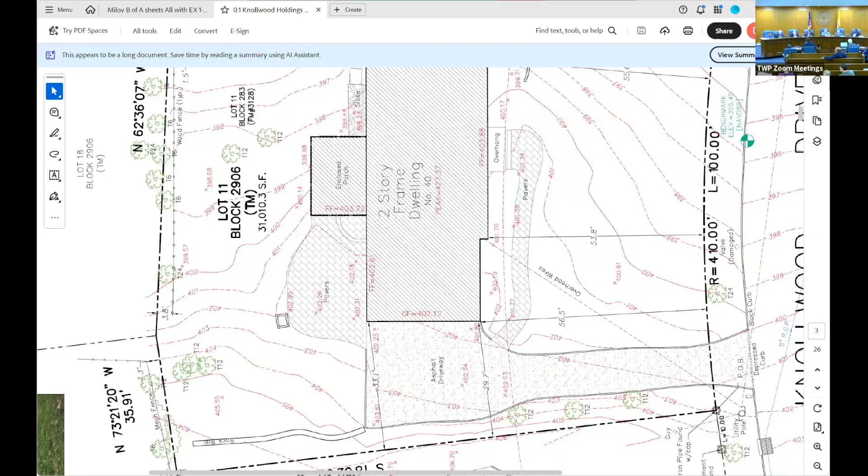Hi, Ashok Narayan, I live at 21 Black Watch Trail. Can you spell your last name please? Ashok Narayan. A-S-H-O-K N-A-R-A-Y-A-N. I live at 21 Black Watch Trail, which is right behind the next street down.

Issues about all these modifications. The diagrams don't really explain it in terms of the environmental impact, because we've had, especially next door, my neighbor, and to a small extent myself, some stormwater overflow. So as to how these changes will affect the pooling of puddles in the backyard, that acutely affects next door, and it affects us too to some extent. And as to how it's being addressed, because if a tree that's there is going to come down, then that'll adversely... I don't know if it's going to come down, maybe the tree still is going to exist. But that's the other question I had.

Okay, let's do one question at a time. Right now we're asking about drainage, right? So is there any impact to off-site drainage? If anything, it's going to be less off-site runoff because we have a very nice dry well and we're picking up most of the roof leaders. Certainly all the new roof area, I think I have this entire back roof of the existing roof included, but we're really collecting and storing a lot of the storm runoff underground.

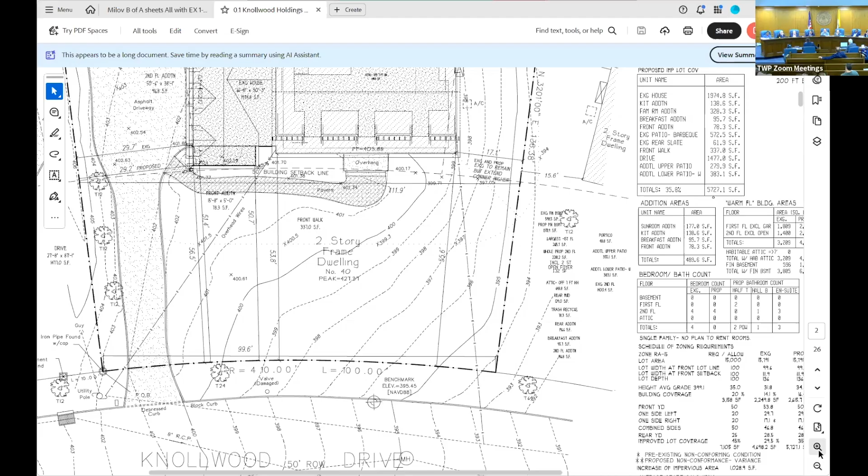It's a little hard to be exact, but what we're saying is that if the board approves a 29.4 foot to the corner, we will do whatever we can with that. We don't have to have a certain size door, but it should be big enough to pull one of these big bins in and out if possible.

Can you pull up the plan for the first floor? Yeah, so we can see the size of that room. Let me just see.

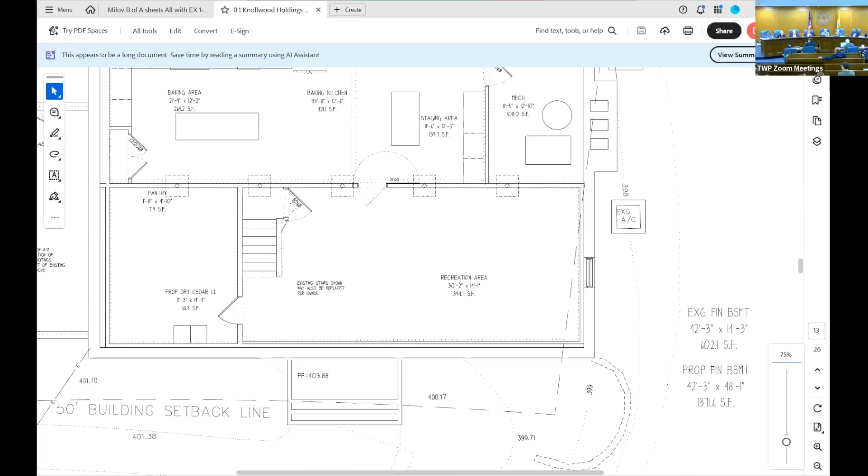The foundation plan has this dimension on it of 5 foot 2 inches out. That's the foundation plan. Can you go to the first floor plan where the room is actually going to be? Okay.

I didn't have the dimension, but it's 5 foot 2 up down this side. So we would have to— it's in your call out, the trash recycle at 15'10" by 5'1".

That's the gross area to the outside surface of the wall. Help me understand, is there a wall that's going to go here, or is this just going to be a bump out of the garage?

There's an existing wall. The garage wall is pretty much right there now, and that would just about all come out. This area would become part of the garage, essentially. It's just open, right? So instead of opening the garage door, you'd open this door?

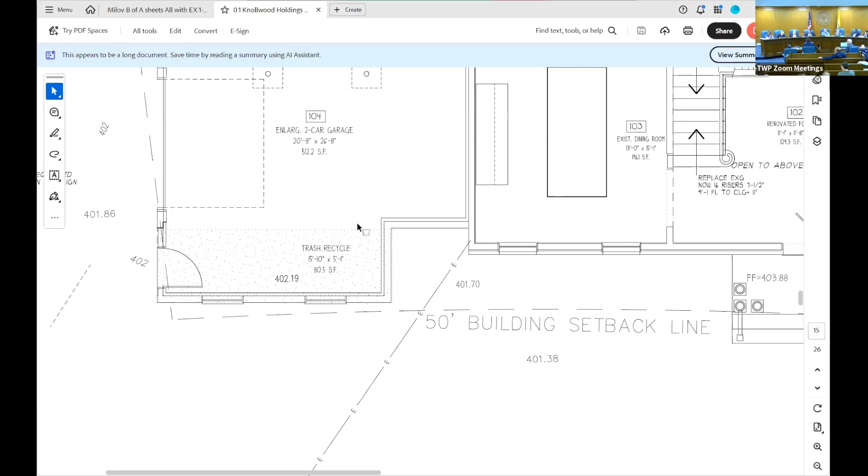Yes. So with those trash cans being like 30 inches wide, you would need a door at a minimum to get those in. Those are the town-issued trash cans, I'm assuming? Yes, I had one measured while we were here. I was trying to get a 2-foot 8-inch door if possible.

Okay, well that's not going to leave you a lot of room for framing. It won't leave a lot of room, but we're trying to be agreeable with the concerns of the neighborhood and the board, and find a way to make it agreeable.

So this proposed solution still doesn't remove the variance? No, it doesn't remove the variance completely, because you can see where that comes all the way into the garage. Yeah, I got you—that's the required setback, actually.

We're just a little over in that one corner, but we didn't want to change the whole look of the house to pull that in a few inches. It's still a request, and it still has to be code compliant. So that's all, thank you. Thank you.

Hi, I'm Craig Chaplick, C-H-A-P-L-I-C-K, live at 21 Canterbury Way. I have one question—I don't know if these plans have contemplated this yet. In terms of electrical service, is there a plan to upgrade the service, not just the electrical, but the amperage coming into the home?

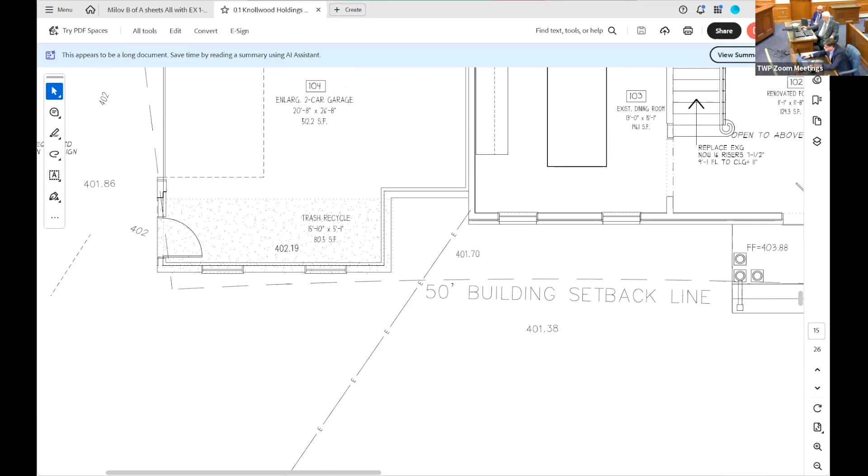Yes, I'm sure we would be upgrading the service. I think you said you want to go underground with it, right? He's thinking that where the overhead wire comes into the house—let me see if I can show it on this plan. The overhead wire comes into this corner of the house now. We would probably put an underground conduit up to this corner and have the main panel there, with an upgraded service.

To what amperage is that anticipated? Is there an anticipation to increase the amperage into the house? For example, my house is 200 amp service. Usually 200 is fine for any big residence. And you're planning to keep it at about 200 amps? I think we'll calculate it, but we can't imagine anything that would be beyond that. All right, thank you. Thank you.

Paul Woodford, W-O-O-D-F-O-R-D, 36 Knollwood Drive.

A couple of questions. In your original plans, you had indicated there were going to be 3 zones for the second floor: one for the master, one for the rest of the second floor, and one for the third floor. Are you going to retain that for the third floor? We thought we would have a separate thermostat so they could put it down low in the winter and not use the habitable attic. So now that zone won't be necessary.

So my next question is, if you have a zone up there and stairs going up, what's to prevent the applicant, after he leaves this board, from developing the third floor attic? You could ask that of anybody, but they'd have to get a permit to do that kind of work. Would they need any zoning variance for it? No, nobody would need a variance for that. It'll be stipulated in the resolution that it's being approved as an unfinished attic. But there's nothing to prevent him a year down the road from making it a finished attic.

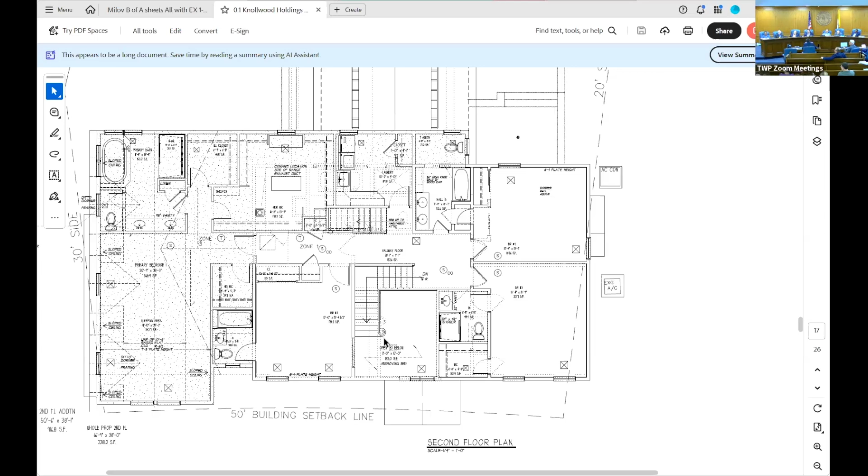Okay, are we going to do the same thing for the kitchen in the basement? Because you had mentioned that maybe somebody later on wants to develop a kitchen down there. Are we going to put the same deed restriction in for the kitchen in the basement?

I think it just has to be done within reason. It seems that, for example, in Morris Township, if you have a mother-daughter apartment, the owner has to sign an affidavit that's only for family occupation, essentially a deed restriction. Do they require that to be recorded? I believe so. So you could record an affidavit, or some kind of amendment to the deed, for example. Well, are you willing to do that?

I think at some point we have to look at what is reasonable and what isn't. Well, I'm just asking, because you say the applicant is giving up the kitchen, but is that a permanent give-up, or are we just pushing the ball down the road? There's no intention to be deceptive. Well, I'm not asking that, I just want to make sure it's not going to happen.

I think he'll probably be able to do everything he needs to do in his main kitchen, and it's allowed to have an auxiliary refrigerator, for example, for proofing dough or something like that. A sink, but no cooking range, for example, which is usually the key piece of a kitchen. So you're still going to put that as a deed restriction?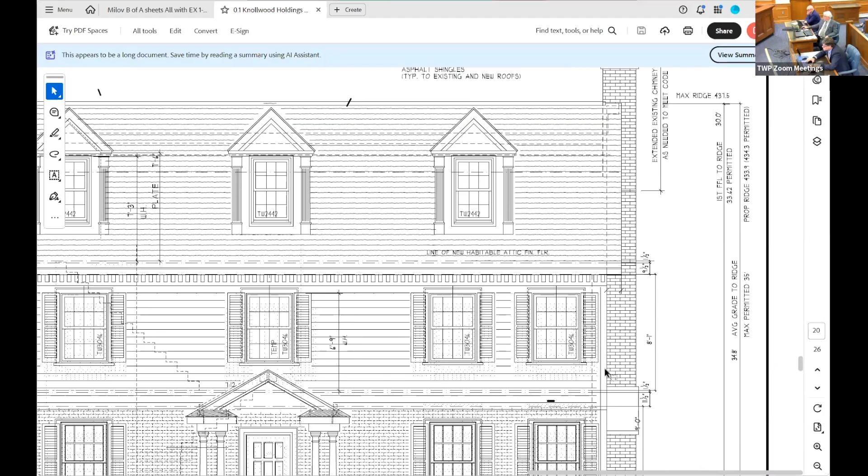It's a little higher.

I can see right now that this grade line is not correctly drawn. I'll have to correct this. It's down here, you see the window there, so the grade is actually lower here, and so I'll have to correct that. But essentially, they would see the grade here, and then you would see this side wall.

And I believe I still show the original roof. If you want to see that, let me just zoom in here, because I'm pretty sure you can see the original roof on that side. It's right here, you see that dotted line right there. Right, so it's pretty close to what's there now, I think. It's a little taller because we're raising the pitch.

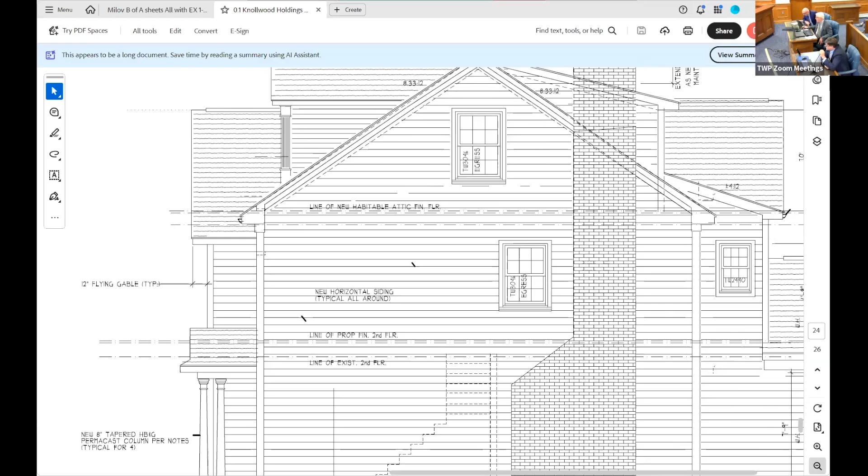How many feet taller, and what's the final result? Yeah, so I think what we're looking at is the point that's being used 20 feet from the foundation — in this corner it's 394.

So relative to that 394, at that corner of the calculation, not from average but from the grade 20 feet off, what is then to the ridge height? Right, so I understand what he's saying. I believe my front elevation is actually more accurate in the sense that the grade is lower on this corner.

Right, which is then 397 straight to the front and 394 20 feet off into the neighbor's property. So what I was just going to say was that this is a 4.5 foot high window right here, so the height from the old ridge to the new ridge is roughly the same. About what's the total number? You can't — what's the total number? It's got to be greater than 34.

I think it's going to be, if anything, under 34.8. I'm sorry, you can't just — yeah, I'm sorry, you can't just speak out from the audience, right?

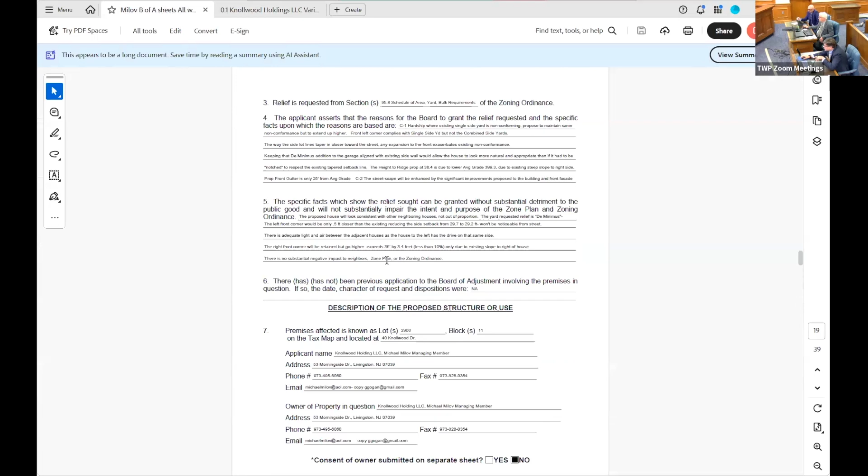Joseph, did you just say that you saw 397 on this right corner of the house? In the calculations that the assistant township engineer provided, that then matched all the average points around the building, at that front — let me just get the direction — plan right, front, northwesterly corner of the building. We provided a point 397 in the front yard and 394 just over to the neighbor's property line.

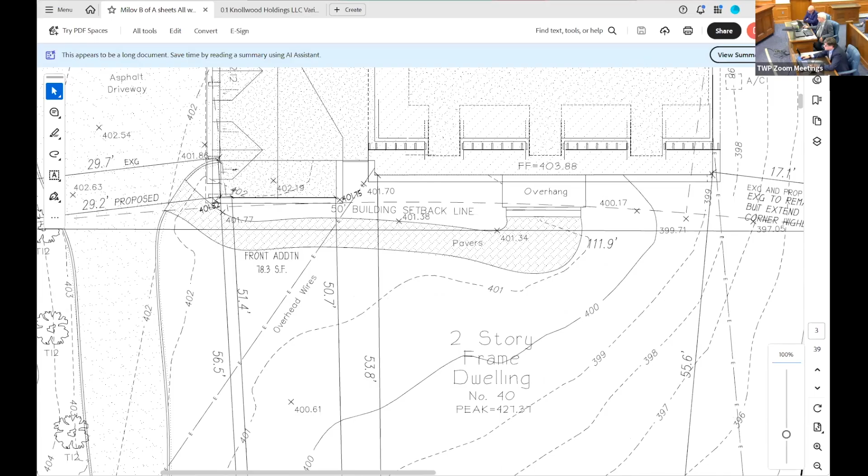Because the setback there is 17.1, the building foundation at that corner is 398.5 per survey. So from 398.5 to 399.1, right? Yes, the 399.1 is what the — say like 7 or 8 inches — it could come from that, 34.8.

Inches below the average grade is what he's saying. Right, Joseph? I want to know the total number. 399.1 — your average grade is at 399.1. 398.5 is the exterior grade at the corner, which is 0.6, right? Plus the 30-foot fixed architectural elevation.

At that corner, measured directly up, it's 30.6. But moving out to the neighbor's property line, where you'd measure from, it's at 394. Right, so you'd be counting part of the grassy hill coming down to that level — that's what you're saying, if you weren't, which is trying to measure from that absolute lowest point 20 feet away. That's a different story.

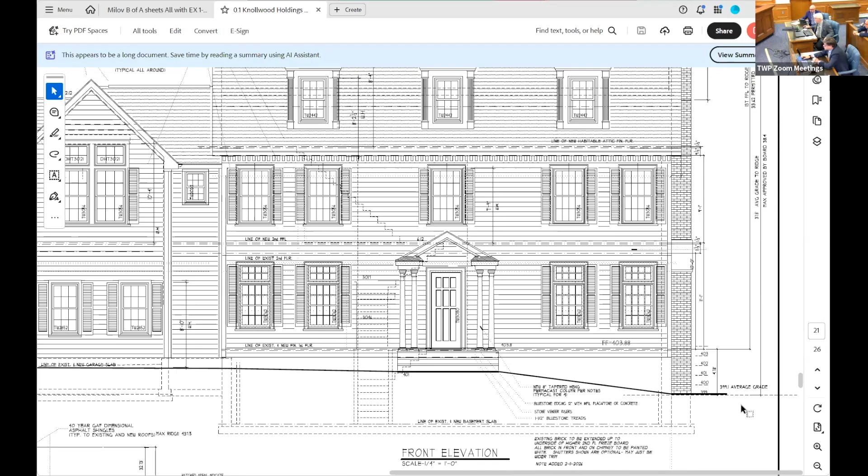But what's from the peak of the roof down to the ground at the base of this house, what is the distance? Right, what Joseph was just saying was that the grade on this side of the house is 398, right Joseph? Roughly 398, along that side — 398 to 398 and a half of the existing grade. So that's actually about a foot below this average grade line right here, which is 399.1. Right, Joseph? That's 399.1, so we're down another foot.

So let's say she would be seeing about 35.8 feet from the ground to the ridge. Well, go to the side elevation.

Okay, so you're saying this ground line is drawn too high here. I don't know, it should have been lower.

Right, but I think that's part of the discussion. If that box is an exposed window on the existing foundation line, you're right, then your existing topography is not burying it. Is your existing topography burying it, and you're now going to expose it by cutting that area?

Well, we've got this door here, so I assume you're not going to go up like that. So my question is, from the base of this exposed wall to that ridge line, what's the distance? Right, you're not going to see this lower section of the wall.

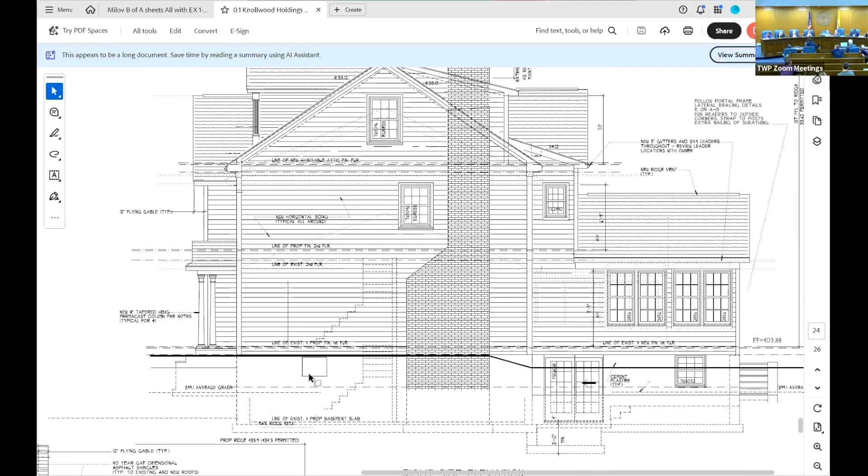So this is all going to be filled here and then it's going to go down? No, this line is going to still be below this window here, where it is now. What I'm saying is, is this portion going to be ground still, or is it going to be exposed? That's about where the ground line would be, yes.

Okay, all right. Now, you've got the roof line coming all the way out to the edge of the building. What purpose of the zoning of the C2 variance does that fulfill? You're saying, why does this gable come all the way to this corner? Right, what zoning purpose does that serve?

Well, I was using two purposes. One is I felt that the pre-existing non-conforming corner right here is 17.1, and a lot of the times, if you try to push a corner back to make it compliant, it actually makes the house look strange, you know?

Well, I'm not saying push the corner back. I'm talking about the third floor, the extension all the way out of the third floor all the way out to that side. Why isn't it just sloped, and what zoning purpose does it serve going all the way out to the edge of the house?

You know, it was a gable roof. We were raising it up, and I didn't even think of changing it to like a hip roof, if that's what you're going at. Yes. So that would really require changing the whole roof system, which we could look at if the board thinks we should.

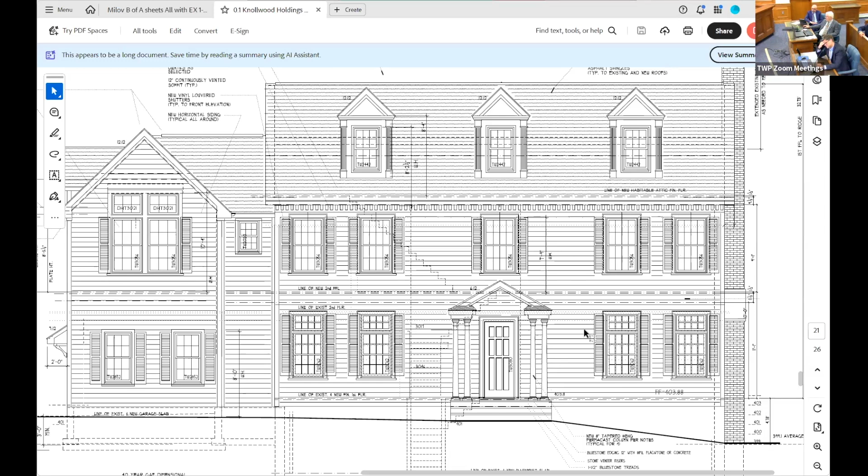Because you could say the same thing about this corner - it exists all the way up here. I just want to make that clear. There's a second floor room right here. We're going up about a foot higher with the gutter line.

And then the roof is where it is. It's a gable that is where it is. We're just increasing the pitch. So it's really a minor change to the corner that's there now.

So what's raising the height up change? You're raising it up about 2 feet, 2.5 feet? The ridge is going up higher because it's a low slope roof right now.

Right, but I'm just saying, what was it - let's rephrase it. What's the height of the building now, as it presently exists? We do have that information up on the cover sheet. Right, so...

It says 31.8 - is that... 34.8. Is that a 3-foot difference from... is that calculated from the same average grade? Same average grade, okay. So what's the justification zoning-wise to go up that 3 feet?

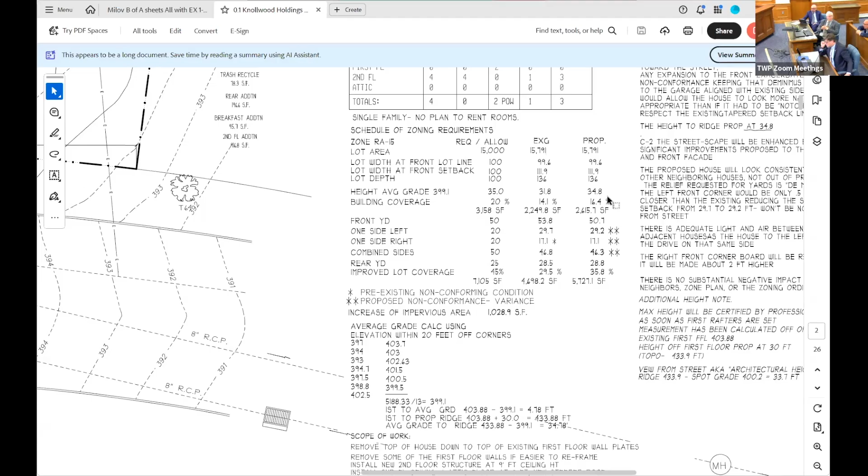Basically, we could keep the roof lower slope, I suppose. It just wouldn't look as nice.

Normally today we try to go with like an 8-pitch roof minimum to make it look nice, and so there's definitely an aesthetic reason to fulfill that purpose, I think. But essentially, there's also a hardship where we have that pre-existing non-conforming corner for a 2-story house that is there now, and it's going to remain.

Well, all we're trying to do is bring the gutter up a foot and then bring the ridge up another few feet. So the C1 proof supports the existing nonconformity in its current configuration. The elevation above it that creates more massing is, respectfully, a C2 proof.

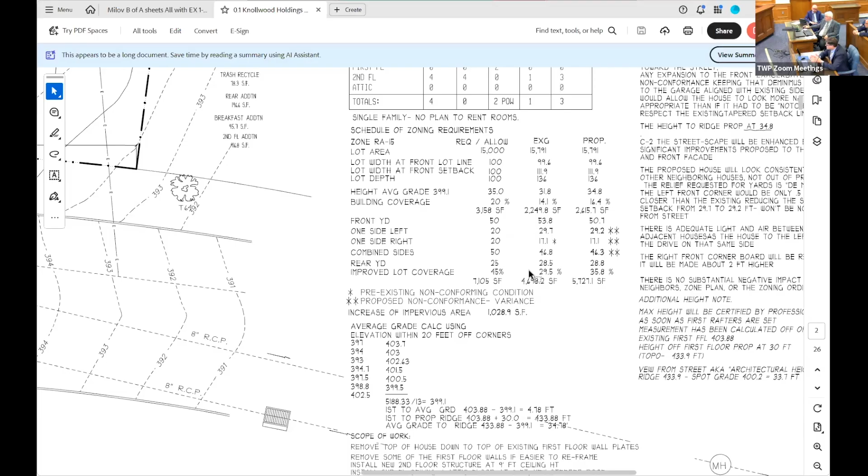It's your choice to bump it out or not, that's your choice. Right, and I think, not to speak for you, but the question being asked is comparatively to the other side, where you're not going to the full ridge height you're proposing, and you're asking for relief to go build above the existing non-conforming side yard setback. Another way to rephrase this: why wasn't that also considered on the west side of the home?

You mean like a hip roof or something? On the east side of the home, the architectural height, the perceived height, is a few feet shorter than on the west side, the garage side compared to the chimney side. That difference is roughly what appears to be, from your plans, the existing ridge height of the existing home. Does that make sense, or did I just further confuse everybody?

The peak on the master bedroom, right here? Yes, is, I believe, roughly in line with your existing architectural height of the attic space prior to the vertical addition on the opposite side. You're right, you're correct. It's about aligned up with that old ridge.

I think the nature of your question was the difference in those two heights when side yard setback relief is requested on both sides to go up above the existing height at that setback. So the consideration provided on one side, what were your considerations on the other, and why perhaps architecturally you chose these decisions?

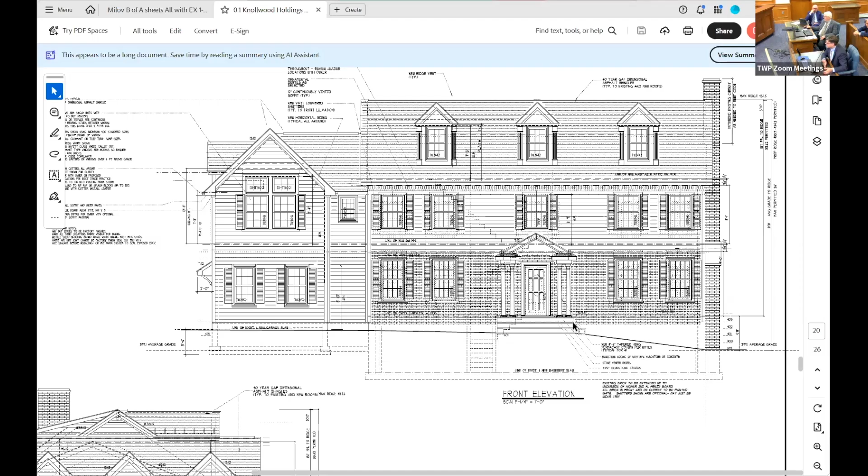Yeah, and I'm not recommending that. I think the question is relative to the difference in height at both proposed non-conforming setbacks. If you're standing on the easterly or westerly side, the perceived height is greater because of the drop in the grade, and the height concession is provided on the easterly side, which is the higher grade. So, without the habitable attic and without the dormers on the non-habitable attic, is there a reason that ridge line would still be the additional height proposed architecturally on the home?

The character of the home, the architecture of the home, keeping with the style of this type of home—is that additional height necessary from the peak on the east side, not carrying through to the west side? I think it would look odd. I think the house has a symmetry to it with the two pairs of windows on each side of the front foyer and entry, and that it would just look like it was something that was forced that would not look appropriate.

What I'm thinking, as you talk about it and as the question comes up, is that we could offer to put some evergreens along this side of the property, which would effectively screen the lower section of the house and provide a visual buffer, going around, maybe turning the corner a little bit here and coming back up along this side. That might soften the effect of that corner and help make it more agreeable.

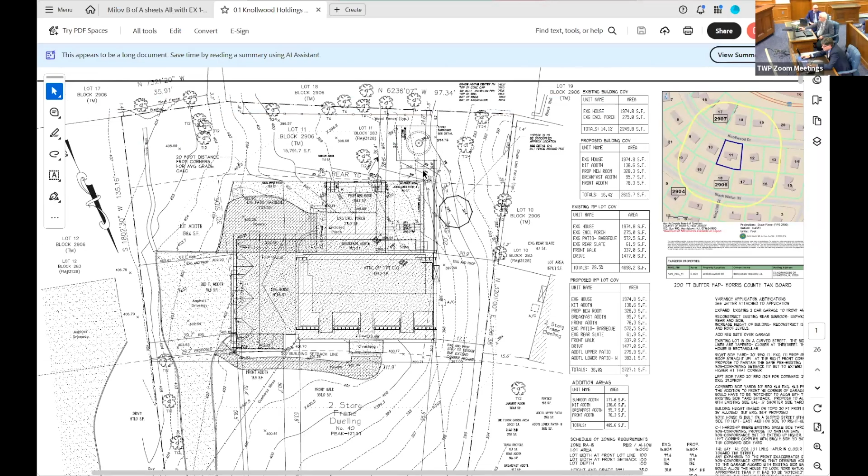Well, it's a small patio in the back that's accessible from the basement. What is the size of the patio in the back? It's 366 square feet. So that's not small. Well, that includes all the steps. There's a low area, and then you step up to a middle, kind of like a big landing, and then you have to turn. So it's not huge, but I don't know.

So the total square footage of that patio area is I'm showing 366. 366, on here.

I had a question on the kitchen in the basement, and maybe I don't know that it's been answered. It sounds like you're taking it away, but part of my question is, there's a township ordinance, section 354-4, that says cooking facilities, no cooking or food prep shall be conducted in any room except the kitchen. So I guess my question is, why would this kitchen ever be permitted if it doesn't seem to apply or be consistent with this ordinance? I just want to make sure that if you've removed it, maybe that's not a problem anymore, but I'm still concerned why it was ever on the drafting board.

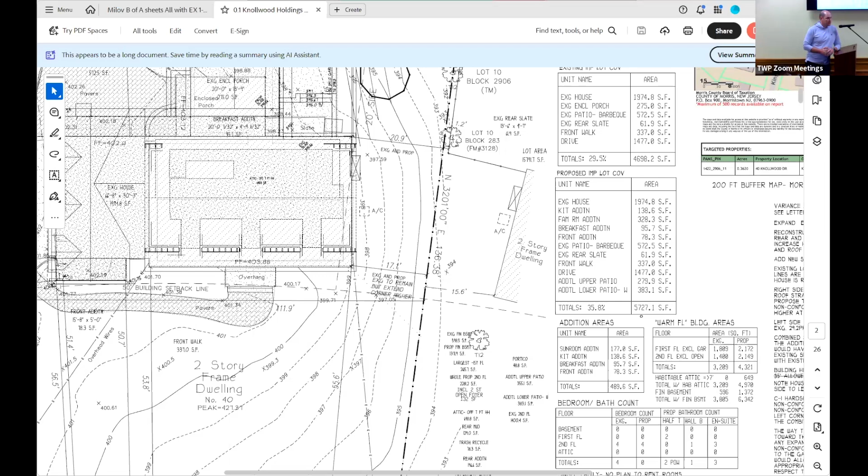So this board doesn't really have jurisdiction over things like that, right? And if they want to submit that as further proof as to what they're presenting, they can volunteer it, but we can't require it. Okay, thank you.

Mr. Aller, there was a couple of punch list items from the previous meeting as well. So I think I covered, okay, so the last time we talked about photos from homes in the neighborhood, again the buffer, but I mentioned that, and the square footage of homes.

And what I suggest you do is just do an OPRA request to the municipal clerk and ask for the assessor cards for each of the homes on the 200-foot list. And then you can just make a chart off of that, and we can see what the square footages are in comparison. Okay, thank you.

All right, so for purposes of the public, this meeting's being adjourned. It will continue in this room at 7 PM on June 22nd. There'll be no further notices from the applicant.

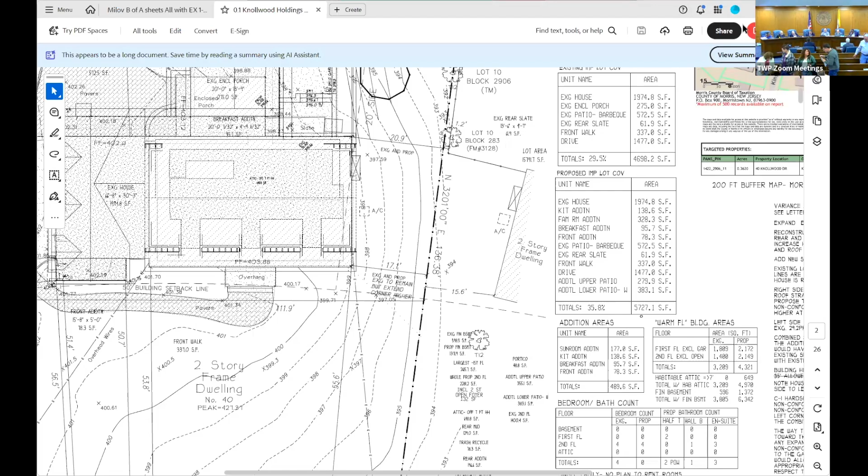How would that come down? No, these last few came up after we closed public portion. We're done with public hearing, so you can submit what you want. The last guy is an architect. That's okay, but that was close. I understand. Okay, so what do we got?

We got left is the 2025 annual report. We've made some revisions to it. Has everybody seen that? Did you post it in the group? Yeah, so we did make a couple of changes to it.

So just the first paragraph, I think we modified a little bit, because it talks about 3 applications being left over from 2024, and then it says both will receive variances, so that's a little confusing when we go from 3 to 2 without an explanation. So we're just going to modify that.